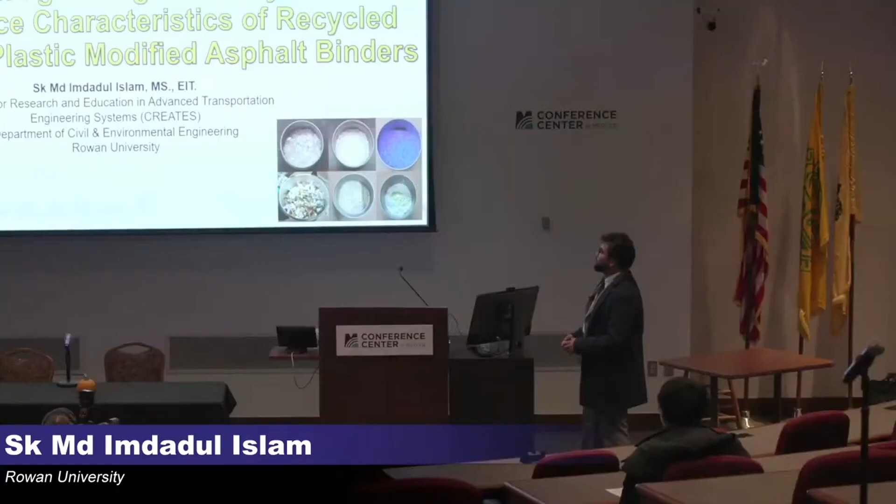Good afternoon, and welcome to my presentation on evaluating the storage stability and performance characteristics of recycled composite plastic modified asphalt binders for the 27th Annual NJDOT Research Showcase. I would like to thank the whole CREATES team from Rowan University under the supervision of Dr. Yusuf Mehta, and also I'd like to thank the US Army Engineers Research and Development Center for funding this project.

Before going deep into the presentation, I'd like to share a quick update on the project I'm working on. Two of my papers, including the one I'm presenting now, have been accepted for presentation at TRB 2026 and also recommended for TRR review.

The whole presentation will be outlined into these categories, starting with a brief discussion on waste plastics, how it has become a global issue nowadays, and how we can incorporate these composite plastics into asphalt binder, the experimental methodology that has been followed, and the results based on phase separation and performance analysis, followed by conclusions and future research scope.

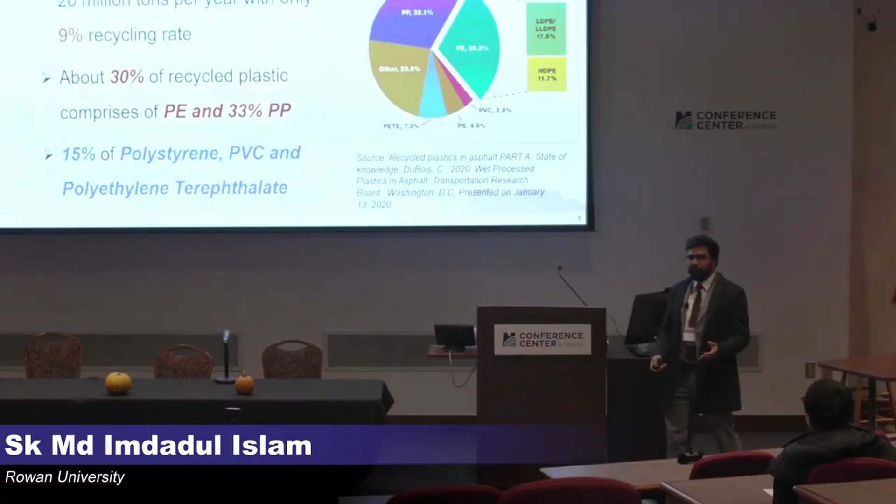If we look into the categories or generation of plastic, the generation of waste plastics has become a major environmental issue, and it's also hazardous for human health. Every year, almost more than 20 million tons of plastics are generated, where the recycling rate is very low, almost 9 or 10%. If we look at the pie chart, we can see there are different types of waste plastics included. Almost 30% is polyethylene, split up into LDPE and HDPE, and another 30% is covered by polypropylene. The others are like polystyrene, PVC, or polyethylene terephthalate.

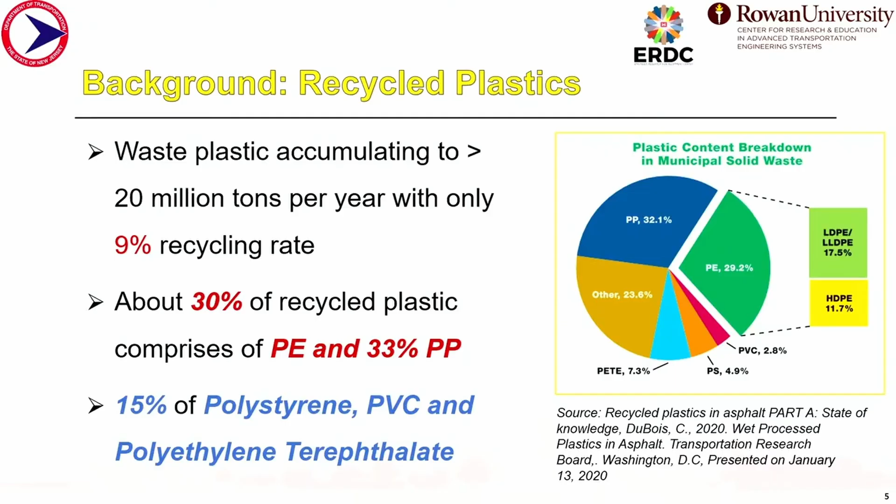Now, as we know there are different types of plastics, how can we identify these plastics? How many of you are holding a plastic glass or anything in your hand right now? If you just look into those plastics, there might be somewhere at the bottom or the corner a code for each type of plastic, whether it is PET, LDPE, or HDPE. So by this code, we can identify these plastics. For HDPE, it means high density polyethylene, LDPE means low density polyethylene, and PP means polypropylene, which actually covers most of the 60% of the overall plastic we saw in our previous picture.

To know better why this plastic is becoming a global issue, we have to know how this plastic recycling chain works. After the end of their use life, the plastic goes into the trash. We just put them in dumpsters, and then they sort it out, move into the recycling industry, shred it into smaller plastics, and then it goes back all the way to the recycling industry for new manufacturing. This percent is the 10% I mentioned earlier, which is very low compared to the overall production each year of waste plastic.

So this 10% is only recycled every year. If we can incorporate these waste plastics into our road infrastructure, there will be a huge scope to fill up this gap with the plastics that go to landfills every year, which is almost 70% of the overall waste plastics.

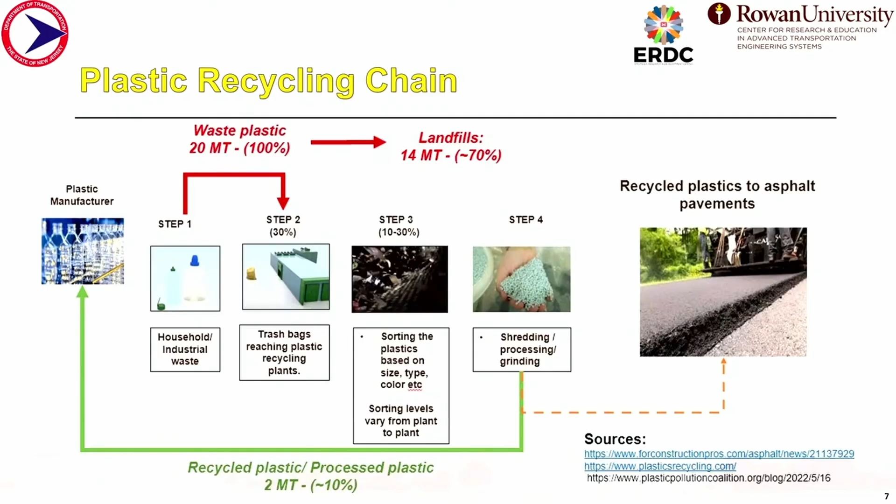As we know, the generation of waste plastics has become a major issue. We also know that pavements in regions with extreme weather or temperature fluctuation experience frost heaving in the winter, and softening effect or rutting in the summer. So how can we merge these two problems and find a solution? We can come up with something to solve these two problems together. The overall objective of the project is to formulate a sustainable pavement or HMA mixture design, including recycled plastics, that can enhance performance to withstand distresses due to weather while mitigating environmental pollution as well.

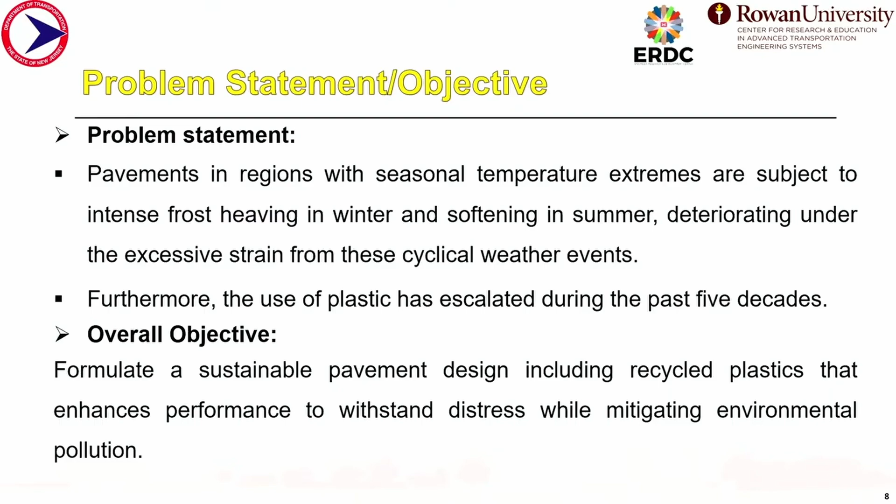Moving forward, this whole presentation will be divided into three main parts, where the first part is how we can incorporate these waste plastics into asphalt binder.

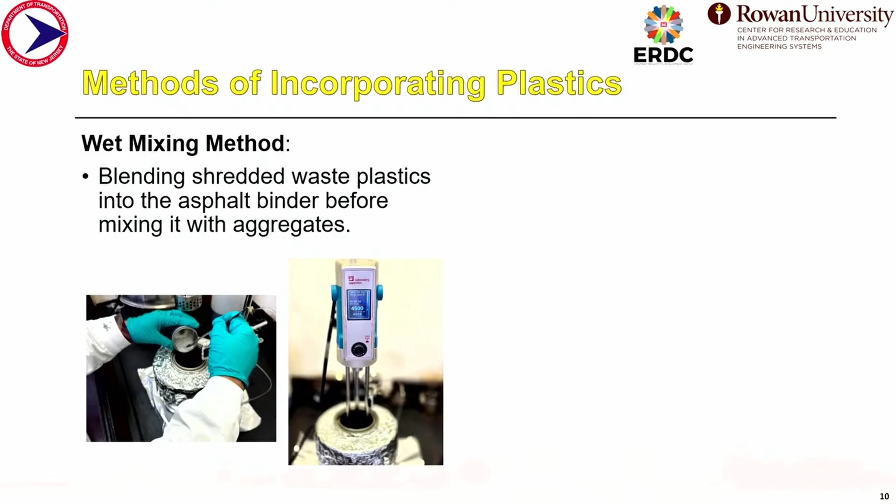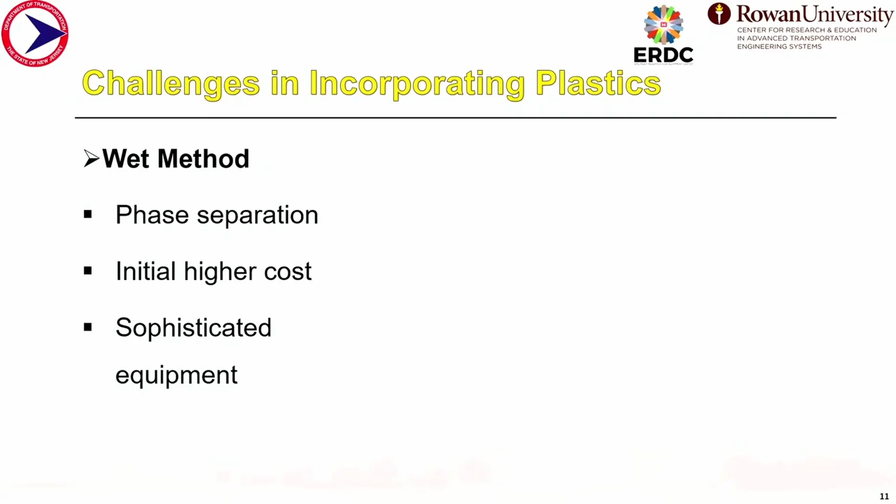As I mentioned, there are two methods, and we have some challenges in both. In the wet mixing method, we have a problem called phase separation, which I will discuss later in the presentation. It also has a slightly higher initial cost compared to the dry mixing method, due to needing sophisticated equipment like the high shear or low shear mixer.

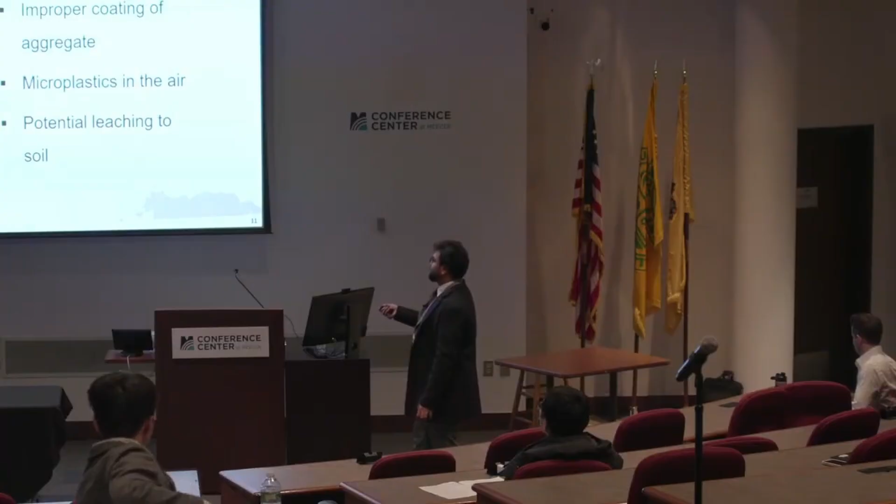On the other hand, in the dry mixing method, we have some serious environmental issues, like microplastics in the air or potential leaching into the soil. Also, we don't know how much or how effectively these plastics are coating the aggregates.

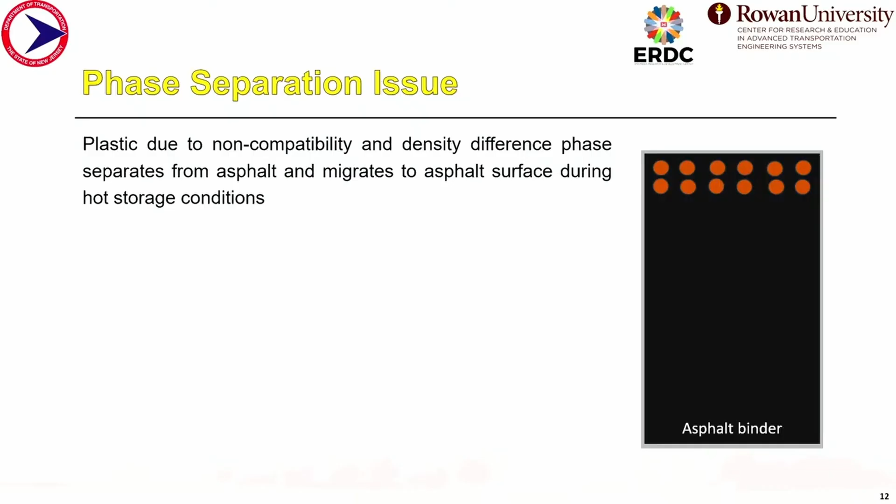So now, why should we care about the phase separation issue, and what is it? Due to the non-compatibility and density difference between the plastic and the asphalt binder, the plastic, after being poured into the asphalt binder, tends to rise to the surface during storage. To better understand this with an animation: imagine this is asphalt binder in a tin. When we pour the shredded waste plastics into the asphalt binder, after the time of storage, they usually tend to go up, as the density of the plastic is much lower than the asphalt binder. This problem is called the phase separation issue in the wet mixing method.

What problems do we face if there is a phase-separated plastic modified asphalt binder? First, there will be variability in field construction. It will not be a homogeneous modified binder, which will eventually reduce the performance of the plastic modified binders, leading to inconsistent pavement quality, premature failure, and higher maintenance cost.

So the solution, since we have to address this phase separation issue if we want to proceed with the wet mixing method, is to enhance the compatibility between the plastics and the asphalt binder using a cross-linking agent to create a homogeneous asphalt binder matrix.

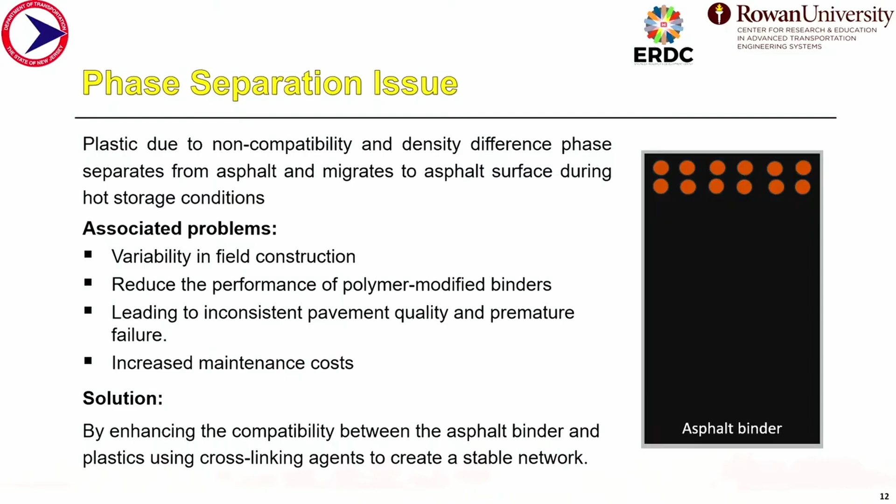With that objective, in our project we selected two types of plastic. In most previous research, researchers used a single source of plastic, like only LDPE, HDPE, or polypropylene. However, in the real field, plastics are not like that - they come mixed; most of them are mixed-use plastic. If we look at a plastic bottle, the top cover is HDPE, and the lower part is LDPE.

So in real life, most of the time we have composite plastic, and according to plastic recyclers, it's sometimes very hard to separate these mixed plastics, which is why they lose demand for recycling purposes. So we chose two types of mixed plastic: one is a mix of HDPE (high density polyethylene), LDPE (low density polyethylene), and PP (polypropylene); the other is a mix of HDPE plus PP.

After grinding and sieving, we get material passing 0.6 mm for blending, because the size, blending time, and everything else were chosen based on an optimization process. After the whole process, we came up with this size for the blending.

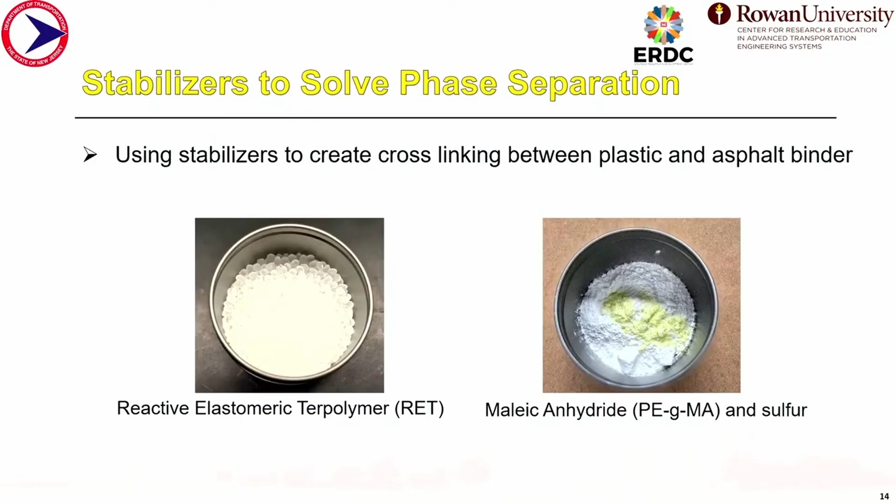The stabilizers selected are reactive elastomeric terpolymer, known as RET, and polyethylene grafted maleic anhydride, known as PE-g-MA, along with sulfur as a cross-linking agent.

This is the experimental methodology followed for the experiments, starting with the virgin binder, PG 58-28, considering extreme cold weather. The idea was that if it can be implemented in extreme weather, it will definitely be applicable to standard weather like New Jersey or others that aren't as extreme, but it will still be implemented. So both mixed plastics were added at a rate of 1, 2, and 3% by binder weight.

We added the stabilizers, including Elvaloy RET 4170 at a 1:1 ratio with the plastic, and also maleic anhydride at 1% by binder weight. Before this mixing or blending procedure, we performed DSC analysis, differential scanning calorimetry, to identify the melting point of these plastics to make sure they don't remain unmelted when added to the asphalt binder, since all these plastics have to be melted. We made sure their melting point is under the usual mixing temperature of 180 degrees Celsius for the asphalt binder while mixing with the plastics.

After blending with these plastics and stabilizers, we did the storage stability assessment, which addresses the problem I mentioned in my previous slides. To do this, we performed the separation index test, also known as the cigar tube separation test, and morphology analysis using fluorescent microscopy.

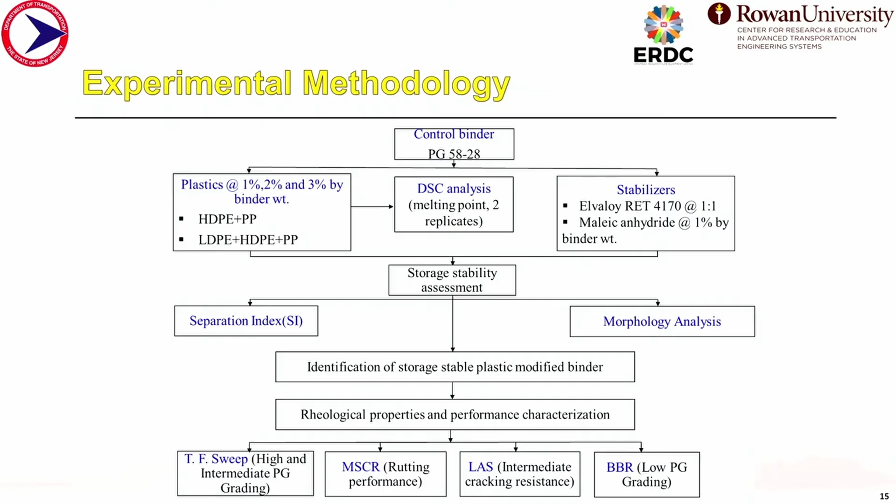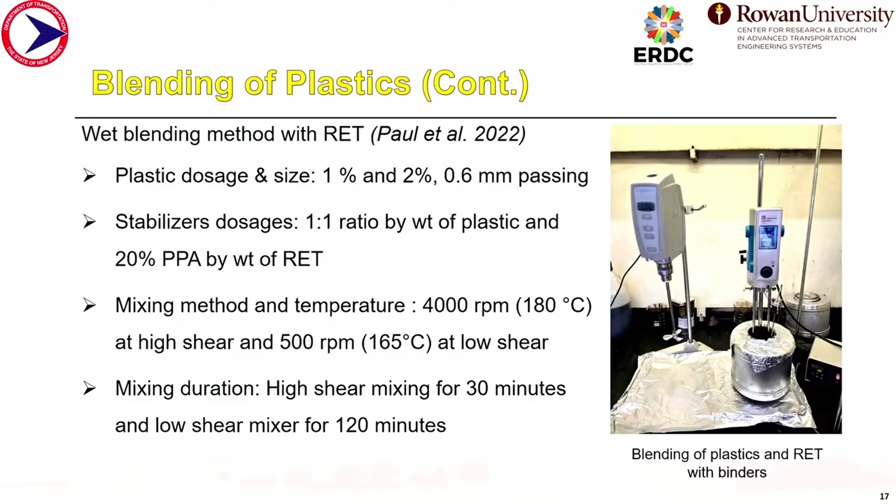With the Elvaloy, there's a bit of difference, as we have to use both high and low shear mixing. Here we see the high shear mixer and the low shear mixer, with different steps in the overall blending procedure starting at 4,000 RPM at 180 degrees Celsius. Then we shift back to low shear mixing at 165 degrees Celsius for another 120 minutes involving the RET.

After doing all these blendings and incorporating the waste plastics, we move to the second part of the presentation, the phase separation assessment. For this, we performed the cigar tube separation test according to ASTM D7173.

After blending all the plastic-modified binder, we poured it into an aluminum tube and kept it vertically for almost 48 hours at 165 degrees Celsius, then shifted it to minus 10 degrees Celsius for another 5 hours. Following that, we discarded the middle portion of the tube and kept the top and bottom portions, running DSR analysis to get G star and sine delta.

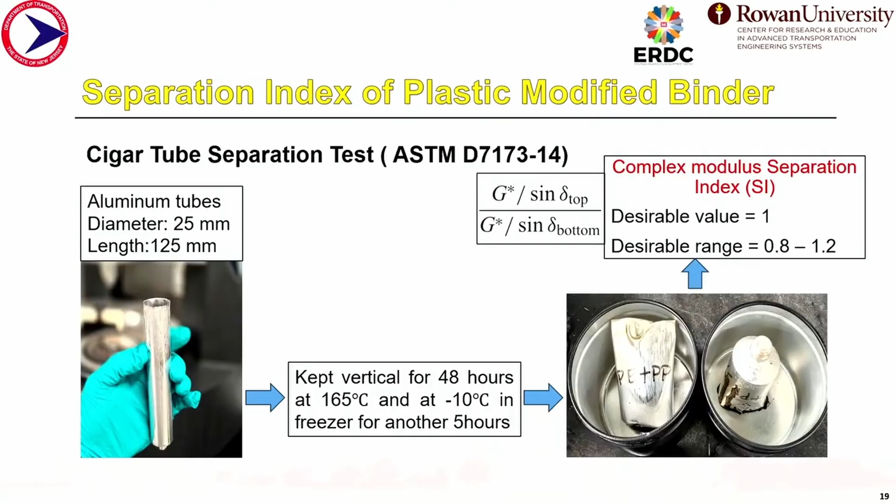The ratio of G star and sine delta is called the complex modulus separation index, which should ideally be 1 if the modified asphalt binder is homogeneous. That means the G star and sine delta ratio from the top and bottom should be equal for a homogeneous mixture, with a desirable variation of 20%, giving a range from 0.8 to 1.2.

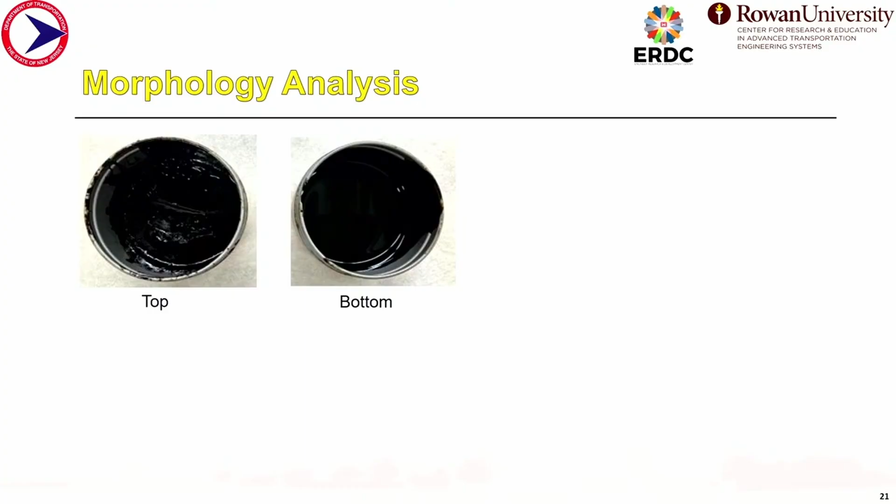To better investigate this separation index, we did fluorescence microscopy on both the top and bottom samples to see the polymer distribution in the blended mixture. We can see the top portion of the binder and the bottom portion from the tube that we get after the polymer modification, using a fluorescent microscope.

We can see the difference clearly at the top. The white globules are the presence of plastic here at the top, and at the bottom we can see there is no plastic. This is called phase separation, and we can clearly see it from here.

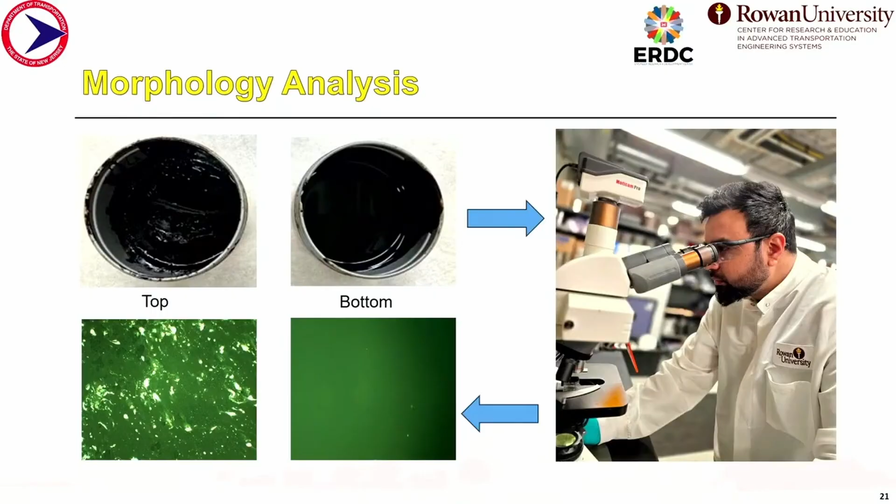Now, moving to the last and third phase of this presentation: the laboratory performance evaluation of these storage stable plastic modified binders.

Starting with the PG grading, we can clearly see that after adding the plastics, for both the LHP and HP plastic, the high PG grading is definitely improving. However, they are compromising the low PG grading.

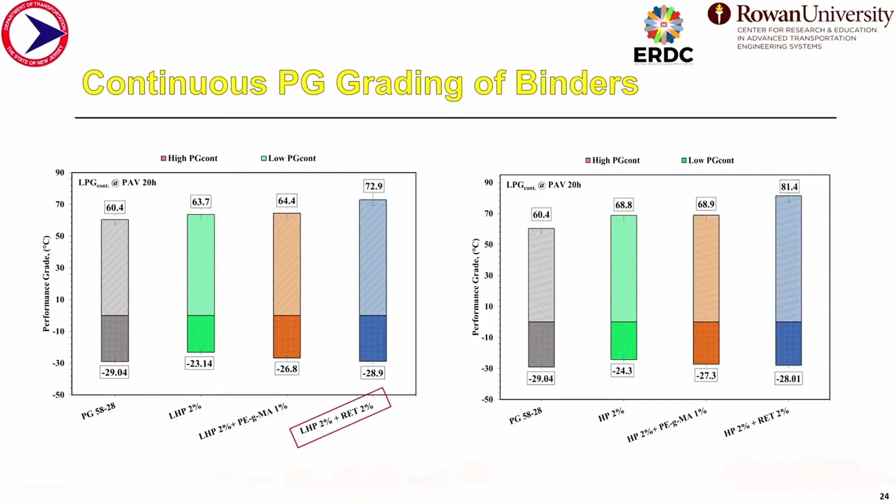But when we add the stabilizers like maleic anhydride and RET, we can clearly see these are improving both the high and low PG grade, where LHP2 with RET is maintaining the low PG grade almost similar to the control binder, which is PG 58-28, and also improving the high PG grade. So from here, we can see RET is performing better than maleic anhydride in terms of both HP and LHP plastic for high and low PG grade.

To further assess the performance at high temperature, we did the rutting characteristics analysis using the multiple stress creep recovery test, where we get the percentage recovery and the JNR value, which is the non-recoverable creep compliance. The higher the percentage recovery for a polymer modified binder, the better the performance of that binder in high temperature or rutting resistance.

From here we can clearly see with the virgin binder and with the plastics, if we go down with the stabilizers, the percentage recovery is increasing with both HP and LHP plastic, where again LHP 2% plastic with RET is showing higher results in percentage recovery.

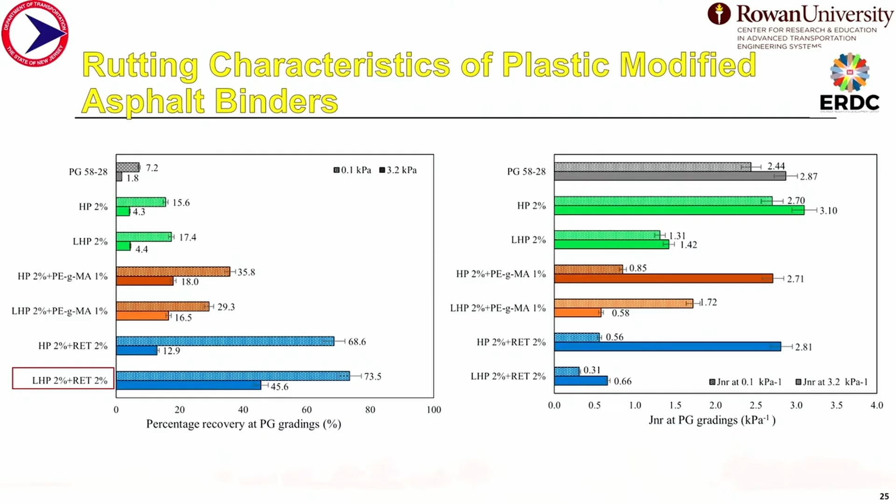On the other hand, the lower the JNR value, the better the performance will be in rutting resistance. Here we can again clearly see the LHP with RET is showing a lower JNR value than the HP with RET combination. From here we can again say that RET exhibits lower JNR and higher percentage recovery, indicating it enhances rutting resistance across various stress levels, as we tested at 0.1 and 3.2 kilopascal.

Now, moving forward, we also did the fatigue life analysis of these plastic modified binders. On the left-hand side, we can see the LAS test at 2.5% strain, and on the right side at 5% strain for the LAS analysis.

Starting with the very left corner, we can see after adding the plastics, there is a reduction in fatigue life for both HP and LHP plastic compared to the virgin binder. However, following the same trend, the maleic anhydride and RET stabilizers increase the fatigue life, where we can clearly see that RET is outperforming the maleic anhydride in terms of fatigue life increment.

At 2.5% strain, the HP plastic with RET performed pretty well. However, at the higher 5% strain, we can see the trend of reducing fatigue life, but the LHP and RET combination shows less reduction in fatigue life. So from here we can conclude that RET is enhancing fatigue resistance, which increases flexibility in the modified binder matrix, thereby promoting better crack resistance.

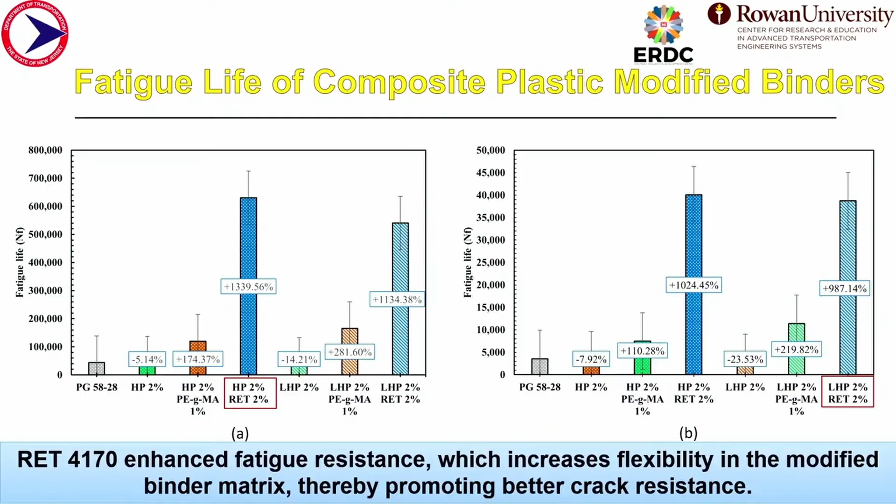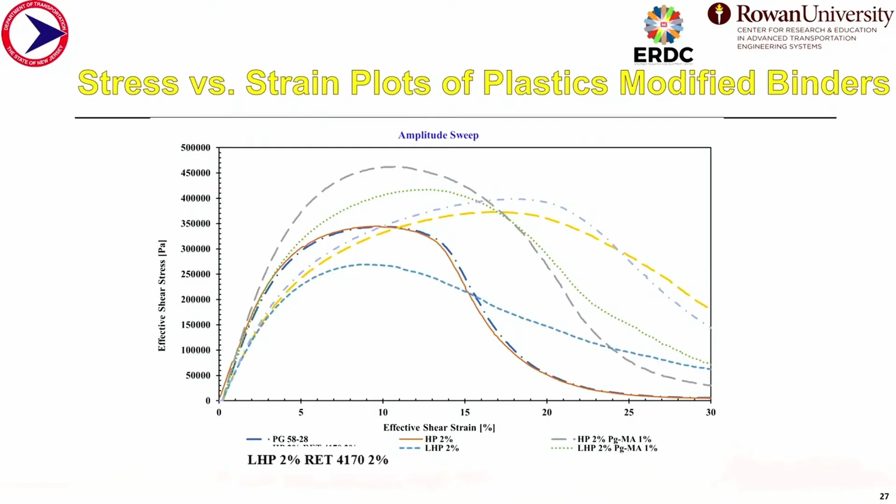For the LAS test, we also did the frequency sweep and amplitude sweep. This is the amplitude sweep results for this modified binder. On the x-axis is effective shear strain, and on the y-axis is effective shear stress. We can see the light blue line, which is LHP2 and RET2, showing the higher failure strength with peak stress, which means it's showing the ductility of this modified binder.

So from here we can again see that the RET modified binders, both for the HP and LHP, especially for the LHP, are performing better, showing ductile behavior, which was helpful in improving the cracking resistance that we have seen already in our previous slide.

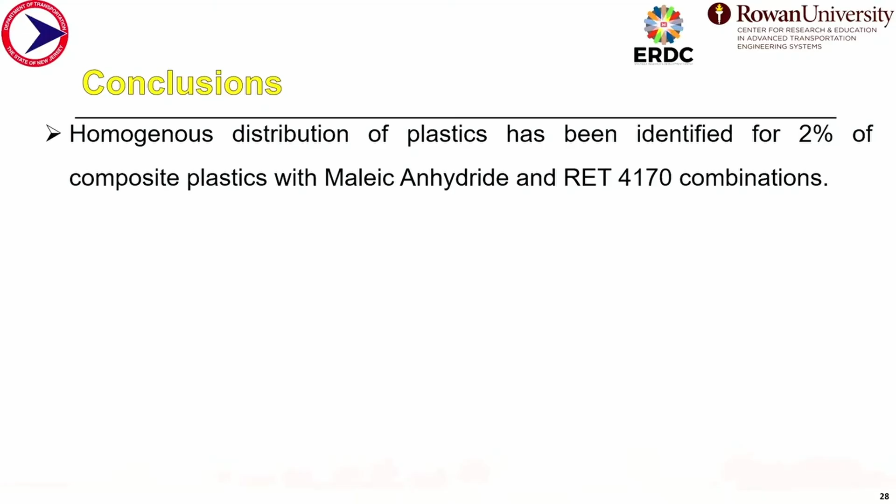So what can we conclude from these results? First of all, we identified a homogeneous mixture, with no phase separation issue, in the wet mixing method with maleic anhydride and RET 4170 stabilizers with 2% plastics. And between maleic anhydride and RET 4170, RET showed noticeable improvement in terms of high and low PG grade, enhanced rutting and fatigue cracking resistance compared to the plastic and maleic anhydride modified binders.

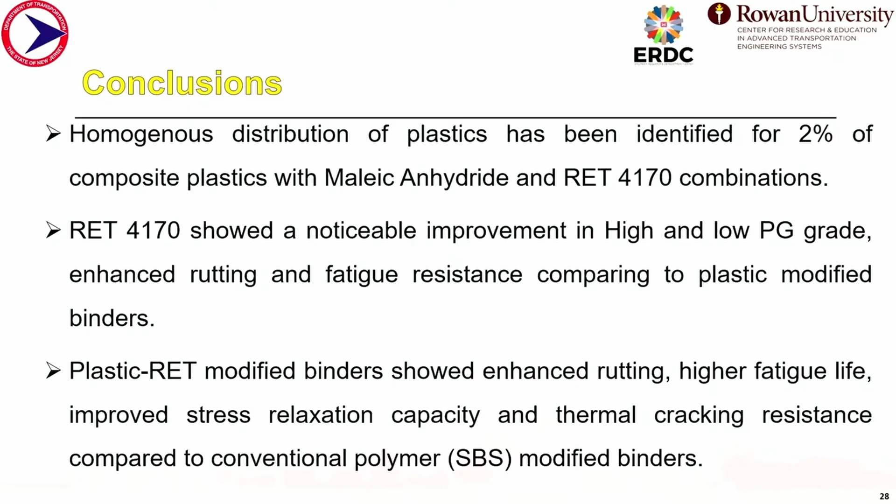It's worth mentioning that we also did a comparative study with the plastic and RET modified binder against the conventional polymer modified binder we have in industry now, which is SBS modified binder. Surprisingly, we found that the plastic RET modified binder showed enhanced rutting, higher fatigue life, improved stress relaxation capacity, and thermal cracking resistance compared to the conventional SBS modified binder.

As a recommendation, improved storage stability and performance of composite plastic modified binders can be achieved using stabilizers such as maleic anhydride and RET, up to 2% of plastic, whether mixed or single-use plastic. Among these, RET performed better compared to the plastic modified binder and the modified binders with plastic and maleic anhydride.

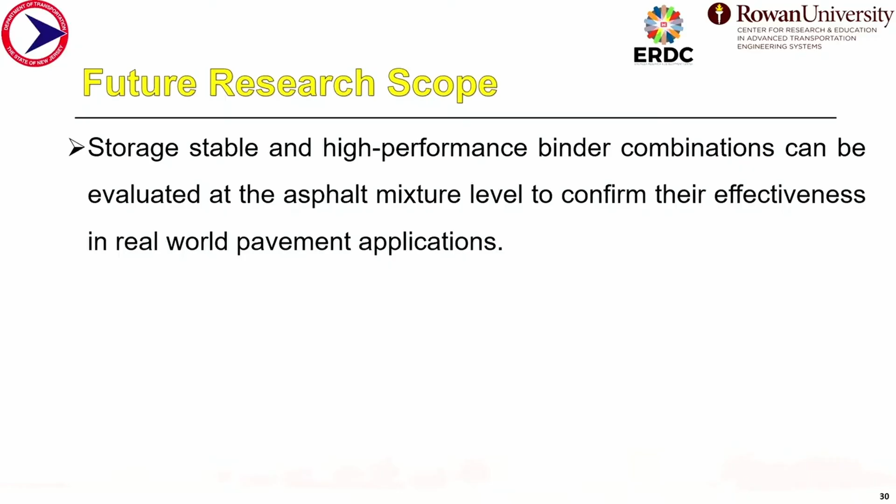So what can be the future research scope? As we did the study at the binder level, to get real-life implementation in HMA pavements, we have to conduct the study at the HMA mixture level to see whether the performance we are getting at the binder level transfers to the mixture level as well.

Last, but most importantly, we have to look for long-term performance data and conduct a life cycle cost analysis for this storage stable modified binder to see its cost efficiency.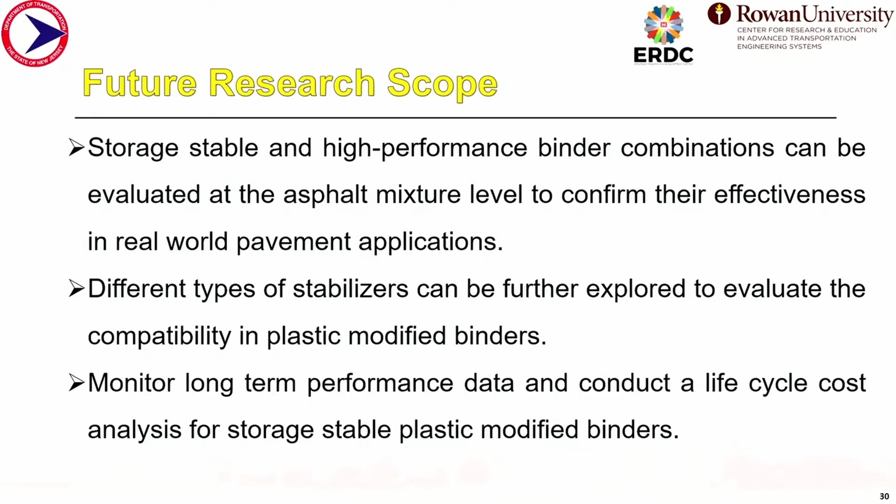So how can this study benefit government agencies like NJDOT? First of all, it's going to give enhanced performance with improved rutting and cracking resistance of the asphalt pavement, and eventually a longer lifespan of the road, which will reduce maintenance cost.

And most importantly, it will help fulfill the sustainability goal of SDG 11, sustainable cities and communities, by incorporating these waste plastics, preventing environmental pollution, and supporting the circular economy, involving plastic recyclers, contractors, and government agencies like NJDOT.

I know it's been a little bit boring after lunch, but thank you all for hanging on there.

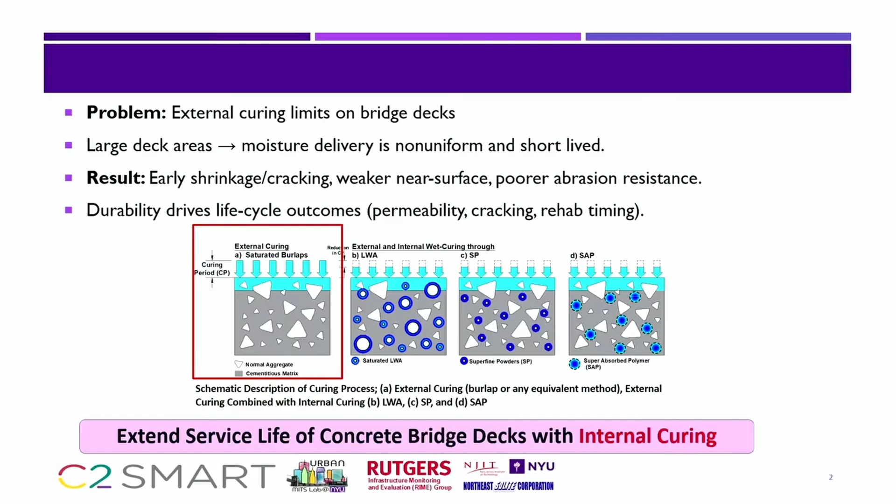So there's a problem of curing when you pour concrete, and there are ways to deal with that. If you don't do the curing well, there'll be cracking. If there's cracking, there'll be problems later on. So there's a drive to fix this problem. And the important part of this, as far as this presentation is concerned, is if there's cracking due to how you treat the concrete in the beginning of its life, there'll be a problem during its life cycle. That will create problems about maintenance, more maintenance, more rehabilitation, and so on, and it will eventually increase the life cycle cost of that bridge deck.

So it looks like there's a lot of new research that Hani's group is doing at Rutgers dealing with internal curing. Basically, it's a better way of curing, and this is an explanation of how this is done. Instead of doing some traditional way of curing, you want to use advanced methods like pre-wetted lightweight fines, superabsorbent polymer, and so on, that will release water inside the concrete. You sustain the internal humidity doing that, and all of that is just to avoid cracking during the curing process.

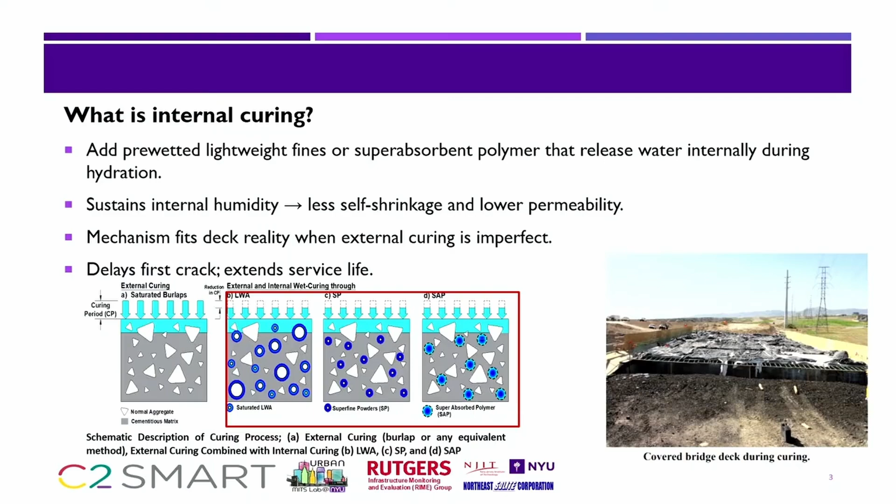So that's kind of the explanation of why we are doing this method overall. This is the importance of internal curing. As I said, it allows reduced cracking, and it avoids later on problems with the bridge deck, deterioration, and so on. So that's the whole thing.

Let me just go back to Nick Vitillo days. This is actually one of the first projects I did almost 25 years ago, when I started as an assistant professor at Rutgers before I moved to NYU. There was a gentleman called Dick Weed, none of you would know. Dick had been with DOT for a long time, and he was interested in life cycle cost analysis. He created a project, and this was my introduction to life cycle cost analysis, because I was doing more technology, intelligent transportation systems. Dick created a problem statement, like you guys do today, and we were able to get that project awarded to Rutgers at that point, I think 1998. So some of you weren't even born then.

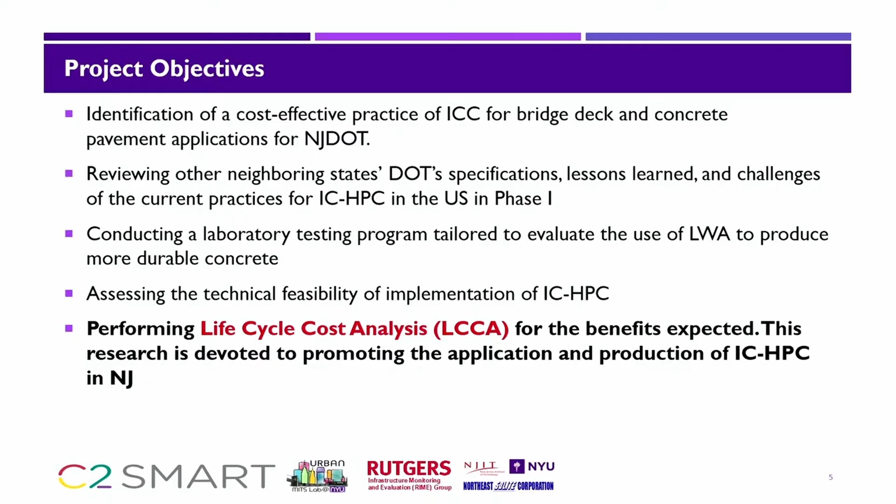What happened is Dick was obsessed with one thing about life cycle cost analysis: discount rate and inflation. At that time, this was not a big problem, and actually there were a lot of discussions with another university, another professor from City University of New York, about whether that's important, whether we really need to care about discount rate and inflation, since we really didn't have great problems with that. But it was our introduction to life cycle cost analysis, and then me and my PhD student wrote the first kind of guidelines for life cycle cost analysis for NJDOT. It's still available online, you can find it. It's one of our papers that we wrote together that was highly cited.

I think some of the ideas we developed at that time, we're still using them here. Actually, people are still referring to our paper, which means they're learning from our paper.

One side note: life cycle cost analysis is generally used for structures and material projects, but we also apply them to intelligent transportation systems. There's a difference because these projects are very long-term, talking about 50 to 75 years, while ITS projects have a life cycle of 5 to 10 years maximum. So you need different ideas for how to use life cycle analysis for that.

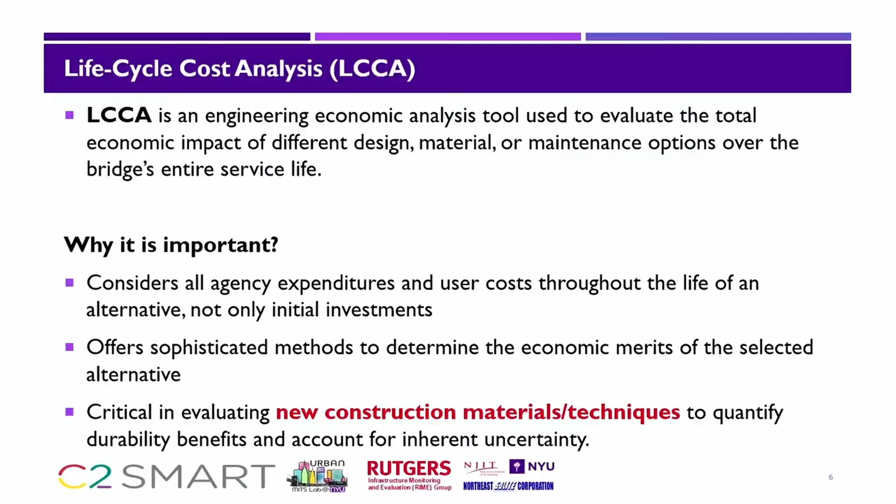So, life cycle cost analysis is an engineering economic tool. It's important because it not only considers agency expenditures, but also user cost—drivers, commuters, and so on—and what we call external costs, social costs. This was important, and was actually one of the key points we discussed even at that time, because how you incorporate these different cost categories into your life cycle cost analysis matters.

Here, since it's a very small task, we don't go into details of how to incorporate each cost category individually. But I'll give you an idea, which you can also think about for other projects, of what it means to have different cost categories.

In our work, and in general, people just use deterministic life cycle cost analysis. That means they fix the input, and then calculate the life cycle cost for a period of time, whatever that period of time is.

But what we advocated is, because you're dealing with such a long period of time, it's more appropriate to do a probabilistic life cycle cost analysis—meaning you assume variables might change probabilistically within certain limits over that lifetime. Then you calculate those probabilistic values using something like Monte Carlo analysis, and your life cycle becomes a distribution of possible life cycle costs that you compare.

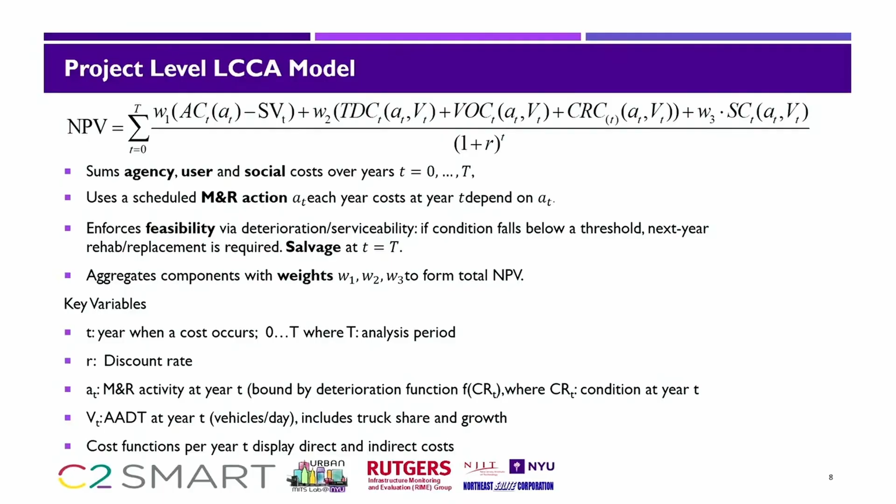For each of these, you have to assume some values for the parameters so you can calculate this function over, let's say, 50 or 75 years. You don't want to do that manually, especially if you assume you have thousands of bridges.

So as part of a different project, we worked with Missouri DOT and US DOT. We developed a spreadsheet you could use to calculate these costs for different types of bridges automatically, using whatever input values you want. You can actually enter the cost variables.

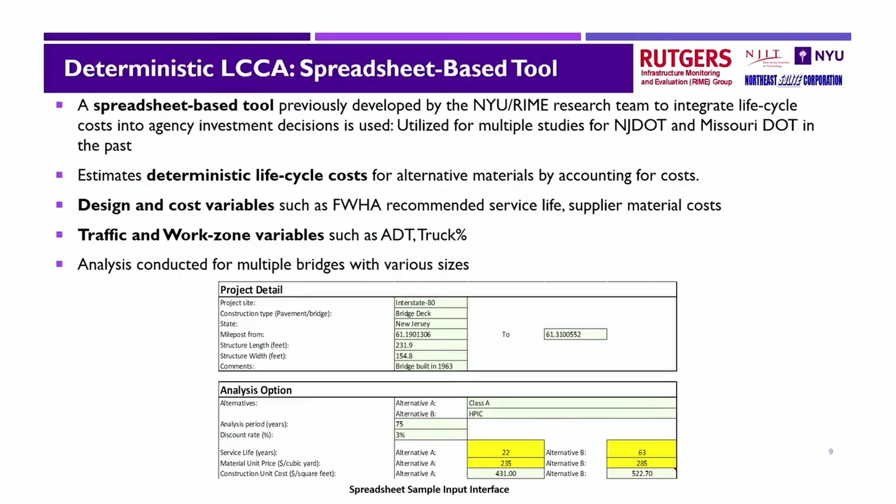But the spreadsheet is very easy. In fact, when I did this project a couple of times for different occasions, we tried to do a web-based version, and it had its own complications. So the best way was to have a regular Excel spreadsheet that anybody can use. So these are the numbers.

So I put the caveat that these numbers are not necessarily NJDOT numbers. These are the numbers we assumed based on federal highway assumptions. Obviously every state is different, and the practices are different, but this gives you an idea.

For regular concrete, it's like 22 years of service life, HPC 40 years, HPIC 63 years. Again, for NJDOT these numbers might change.

Material costs are the most tricky ones, and they're changing every day. There's a new tariff, it's 100 times more, there's more inflation, it's 50 times more. So these are the material numbers that Professor Nassif's student got from manufacturers, we got from the literature. But we also have numbers from NJDOT that we will add here, and they're not the same. They're different, actually.

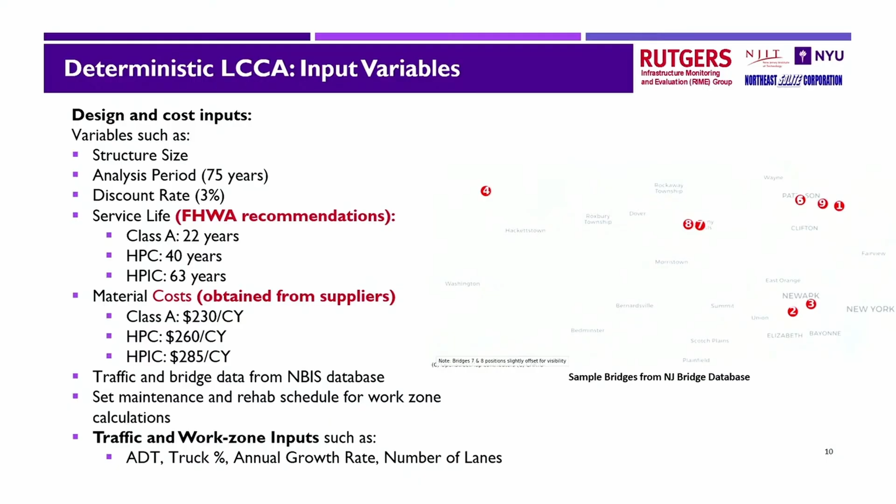But the good thing about the spreadsheet is, if you have the numbers, you put them in and you get the overall life cycle. Of course you also need to make some other input assumptions, like average daily traffic, truck percentage, annual growth rate, number of lanes, and so on.

There are a couple of things you have to be careful about when doing this kind of long-term analysis. You cannot grow, for example, the AADT indefinitely. So you need to have some constraints on certain variables that should physically make sense, especially if you're looking at one segment, one bridge. So that's also in the spreadsheet.

So what we want to see is if HPIC versus HPC is more beneficial in terms of service life, agency cost, and overall social cost. To do that, we took one bridge from I-80, and put the variables related to that bridge into the spreadsheet. We found that HPIC is much more advantageous with respect to regular Class A concrete, and there's also a lot of savings versus HPC.

But as you see, these are some point estimates that we're using. Still, it gives us an idea that this new method, due to less cracking and less long-term rehabilitation and maintenance needs, is going to be much more advantageous than the other two methods.

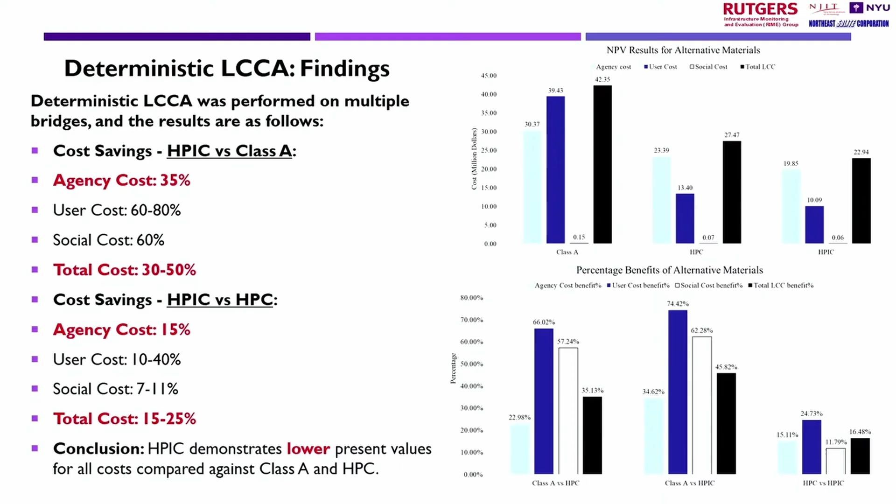Compared to HPC, there's 15% less agency cost, user cost can be between 10 to 40%, social cost is around 10%, and total cost savings between 15 to 25%. So if you multiply that with all the bridges you will build or rehabilitate in the near future, that might translate into some meaningful numbers.

But we want to do a little bit more than that. Because it's a long time period, we want to take the uncertainty into account and do a probabilistic analysis.

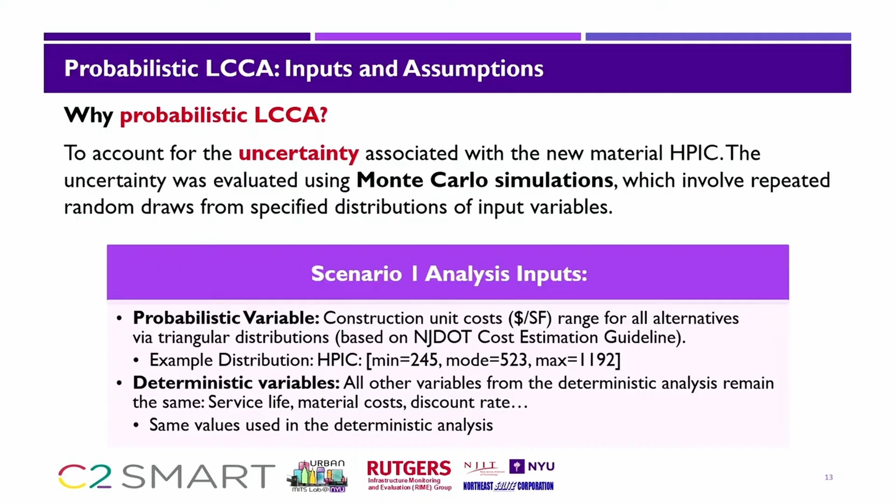This means we're going to draw these variable values from a predetermined distribution, and we will use Monte Carlo simulation to calculate the life cycle cost analysis for HPC and HPIC many times to see how they change based on these probabilistic numbers from predetermined distributions.

When we do that, 5,000 runs—you can do 10,000, however many runs—this doesn't take too long for a single bridge or multiple bridges. But if you have to do that for 5,000 bridges, obviously it will take much longer. You can build these distributions for HPC and HPIC costs for different runs.

And you see this, they look like a Gaussian distribution. And if I draw the CDFs, then you see that for most of the probabilities, HPIC remains a better option if I look at the CDFs.

This was only for one variable, changing the construction cost. But if you change multiple variables, the simulations become more difficult.

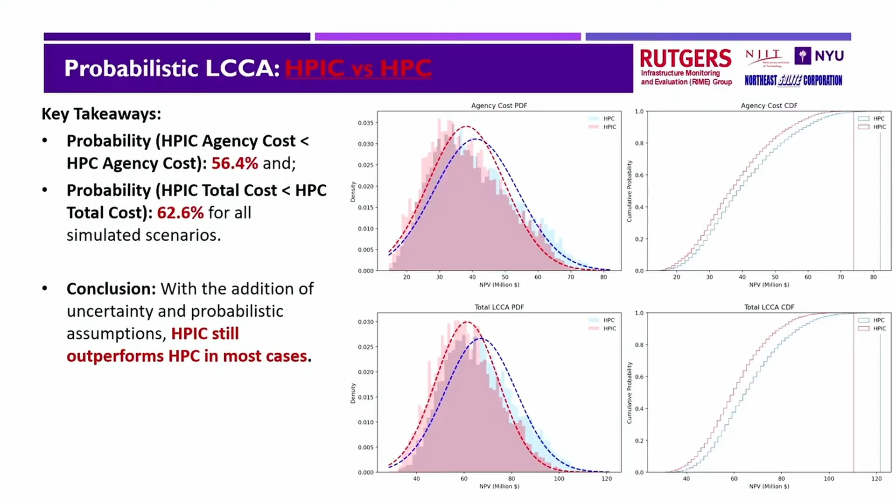So HPIC still outperforms HPC. One thing to note, we did this for 9 bridges. If you want to do this for thousands of bridges, you need a different approach. And if you have to optimize this, for example for a budget constraint, you need some kind of optimization algorithm, like genetic algorithms, which would be even more computationally demanding, but we're not going to do that. We're just running this for multiple bridges and seeing how it works for different ranges of probabilistic values.

So the last topic was a discussion from our projects, basically looking at the social cost of carbon, which comes from a paper published in Nature. It's a long topic, and there's no time to go into detail—this isn't our invention, but some people looked at the social cost of carbon. That means if some approach releases carbon, it might, in the long run, have effects on the environment, and they quantified this effect. We then tried to do some very simple analysis based on the values in that paper.

What we found is that HPIC has higher benefits, even though it has some higher carbon release in the beginning, over a long time at different discount rates. I don't know if this will stay in the final report, but this was a discussion, and these results show that even though the initial carbon footprint of this method is a little higher than regular HPC, in the long run, due to its advantages, it still becomes superior to HPC.

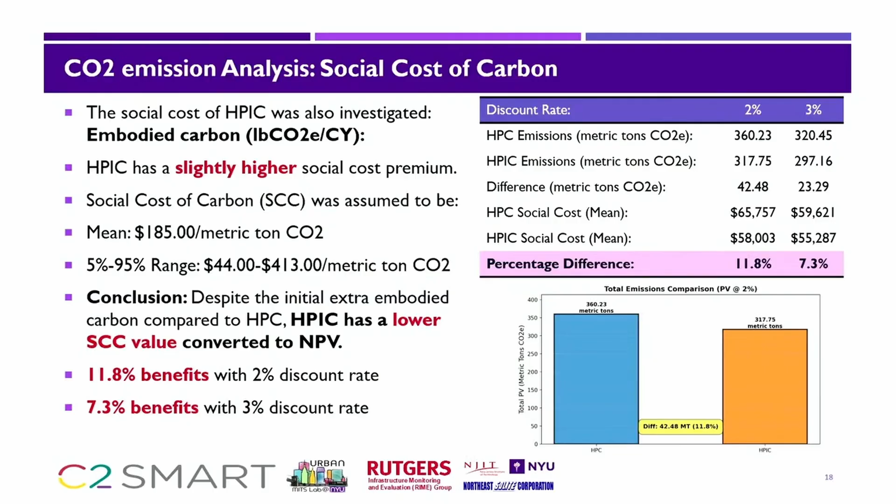So the conclusion is that for most of the bridges we tested, HPIC costs are lower than HPC costs. The total savings are around 30 to 50 percent for using HPIC versus regular concrete, and HPIC versus HPC, that's between 15 to 25%. If you think about the number of bridges and projects, that might translate into some meaningful savings. We also did a probabilistic analysis that showed similar results, maybe with lower gains due to the possibilities and combinations of different probabilistic values. In the social cost analysis, HPIC also turned out to be more beneficial, although its initial carbon footprint is a little higher.

So that's pretty much where we are. The report and results are still being reviewed. We're adding New Jersey numbers—I don't know exactly, Hani knows it better than I do. There'll be a final report that'll be available to NJDOT. So with that, I'm going to stop and see if there are any questions.

All right, thank you, Professor. That sounds like my class.

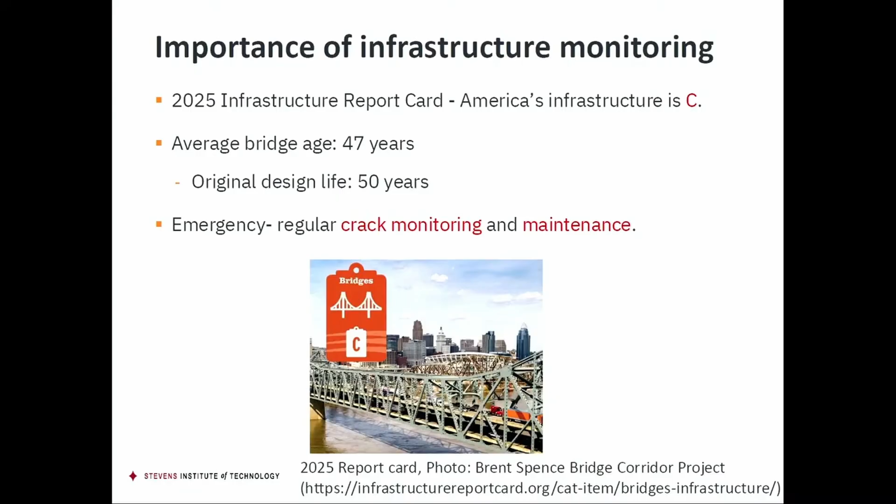That means we should do regular crack monitoring and maintenance. Although there are already existing crack monitoring techniques, such as acoustic emission, static distributed fiber optic sensing, and robot-assisted inspection, they all have different advantages, such as far-field crack monitoring, finer spatial resolution, and reduced human intervention.

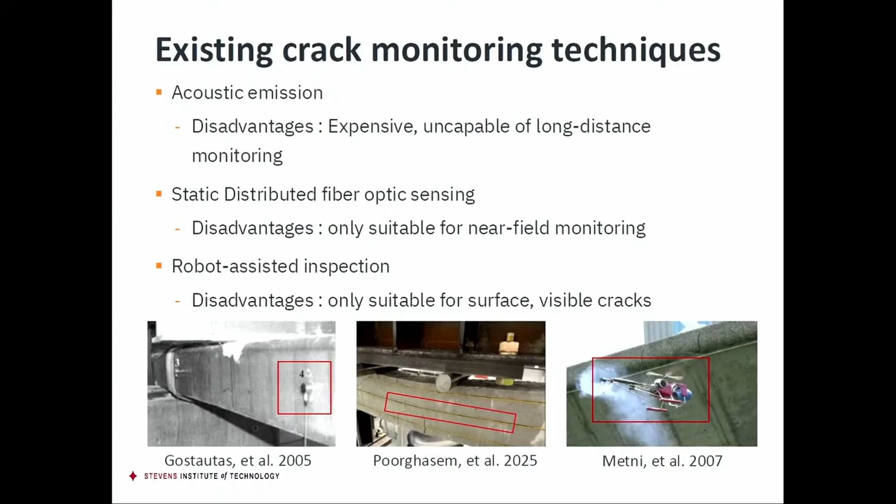However, if we use them for far-field and long-distance infrastructure crack monitoring, especially for bridges, they have disadvantages, such as being expensive. Acoustic emission is a point-based sensor, so it's expensive if you lay out a lot of sensors. Second, static DFOS is only suitable for near-field monitoring. As for robot-assisted inspection, it's only suitable for surface and visible cracks.

This led us to focus on an emerging technique called distributed acoustic sensing, or DAS. It's based on Rayleigh backscattering, and is already widely used in traffic monitoring, seismic monitoring, and marine life monitoring. It has shown far-field monitoring, real-time monitoring, and long-distance monitoring capabilities with cost-effectiveness.

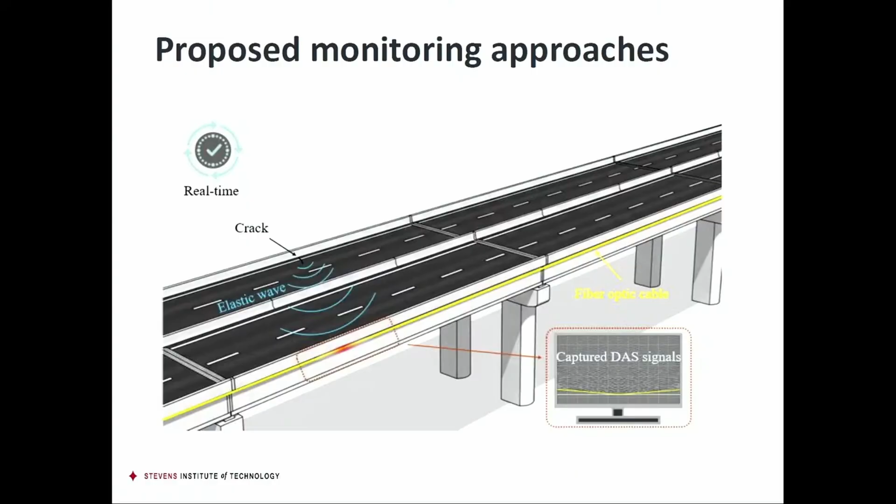Then we proposed this method. First, we installed the fiber optic cable at the bottom of the bridge deck. When the crack initiates or propagates, it generates elastic waves which can be captured by our fiber optic cable. In real time, you will see the stream at the data acquisition system, and by analyzing the DAS signals, you will find where the crack is.

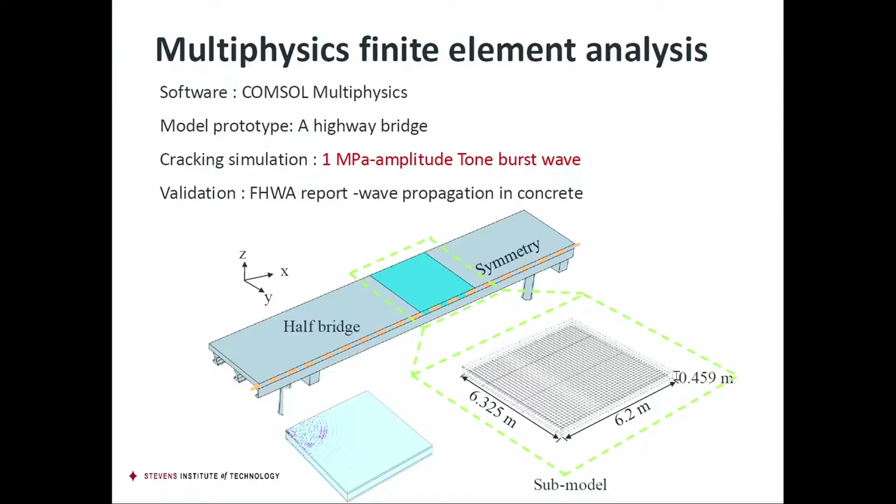After proposing this method, we wanted to validate it, so we tried multi-physics finite element analysis. Our model is based on a typical highway bridge in the US. To be conservative, we used a very extreme small amplitude, a 1 megapascal amplitude tone burst wave, to simulate the cracking signals. To validate it, we used the FHWA report on wave propagation in concrete.

After proposing the method and completing the numerical simulation, we considered whether we could transfer the simulation results to real DAS signals, because most researchers have overlooked that—they think the simulation results are the same as the real results, but actually they're not, because the simulation is influenced by the mesh and other dimensions.

Also, the DAS system has different configurations, like gauge length, channel spacing, and sampling rate. So we did data processing, proposing to use cleaning, moving average, spatial downsampling, and temporal downsampling to achieve the conversion from simulation results to DAS signals. Then I'll show you our preliminary results.

The first important question is whether a crack can be monitored. We set a clear criterion: if the DAS signals we captured exceed the DAS sensitivity, measured in nanostrain, then we assume the crack can be monitored by the DAS. As shown here, our analysis found cracks larger than 20 millimeters in length and 20 millimeters in depth can be monitored at 6 meters away.

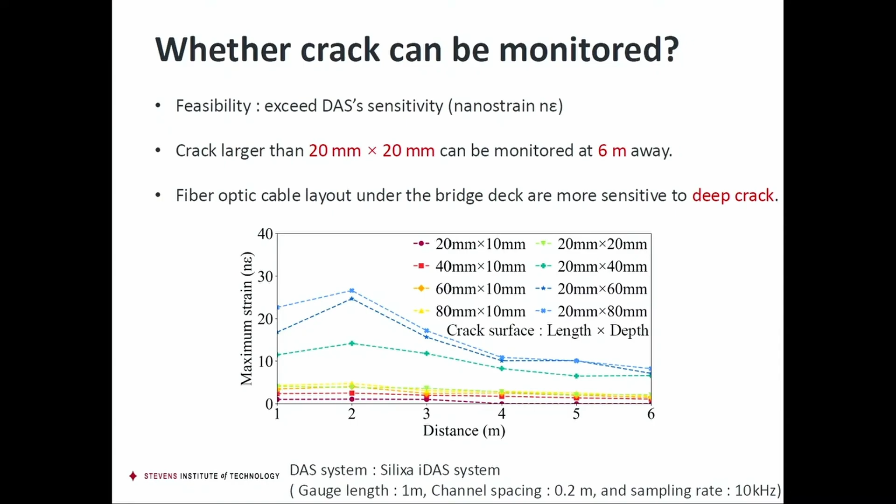If we get DAS signals and don't know whether they belong to a crack, traffic, or pedestrians, we use a method that analyzes frequency. To be conservative, we used an extreme small frequency for the cracking signals, 15.4 kilohertz. We set a monitoring point at far field, 6 meters away, at the bottom of the bridge deck. We captured and analyzed the wave, and found the frequency spectrum always exceeded 10 kilohertz, even at 6 meters away.

This is significantly higher than vehicular traffic and pedestrian activities.

At last, we are thinking about whether a crack can be located using the DAS signals. So we have done a lot of tests, 60 sets of data with different crack sizes and different distances between the crack and the fiber optic cable.

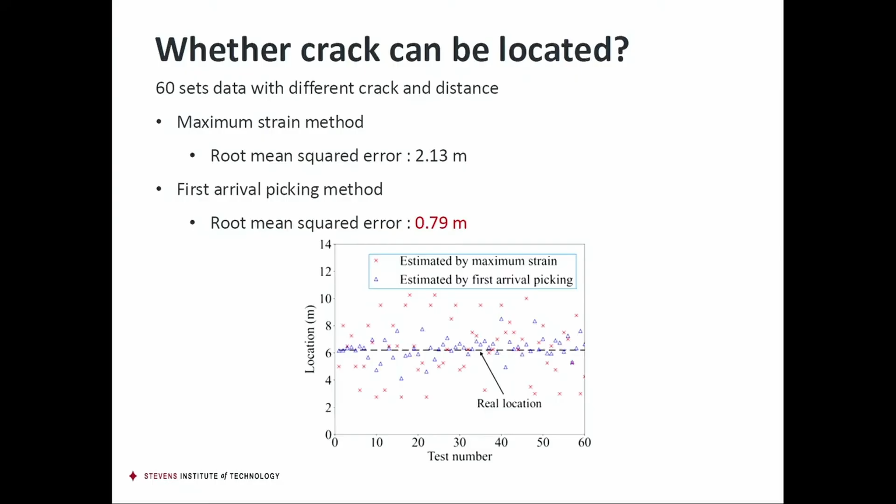And we use two methods. The first one is the maximum strain method, and we found the results are not promising. So we proposed another method, which is the first arrival picking method. This method has already been widely used in acoustic emission and also ultrasonic testing, and we got promising results.

So after the initial validation of our proposed method, we wanted to know what influencing factors will influence the potential performance. The first and most important is the system configurations. We have done a parametric analysis with different configurations of the system, and we found that especially three parameters—gauge length, channel spacing, and sampling rate—will significantly change the signals you captured and extremely change the signal features, such as amplitude and also the waveform.

So we quantified it as the absolute maximum strain and estimated crack location. And finally, we found that coarser gauge length, lower sampling rates, and also coarser channel spacing will lead to underestimation of crack severity. Among the configuration parameters of the DAS system, channel spacing exhibits the most significant impact on localization performance. So if you use the DAS system to monitor a far-field crack, it's better to use a finer channel spacing.

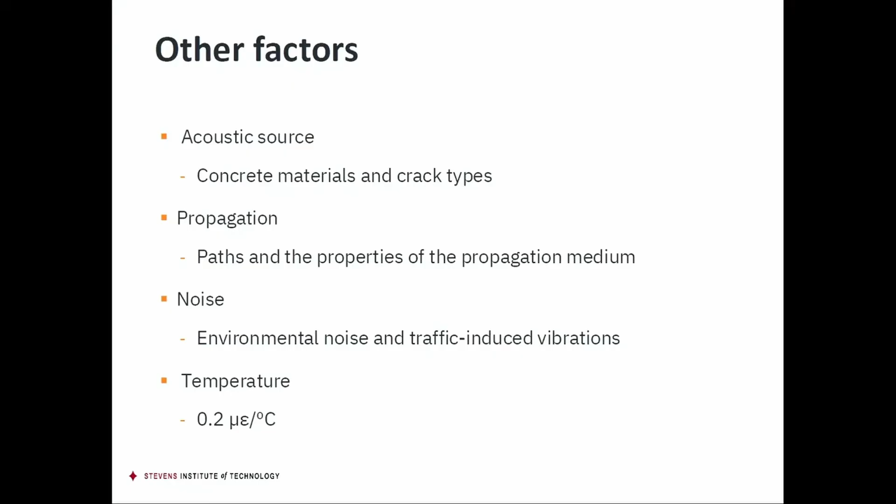However, it's also easy to deal with it. We can use temperature compensation, such as installing another distributed temperature sensor. And due to the temperature change always being a long-term change, at least minutes or hours, but the cracking signal is at the millisecond level, it's easy to do the compensation.

And finally, we have done a comparative evaluation. First is the performance. Although there are already some other existing monitoring techniques, such as acoustic emission and static DFOS—although acoustic emission has higher sensitivity, it's just a point sensor, and we cannot use it for long-term or long-distance far-field crack monitoring. Static DFOS has a sensitivity of microstrain, which cannot achieve far-field crack monitoring. However, DAS can do it.

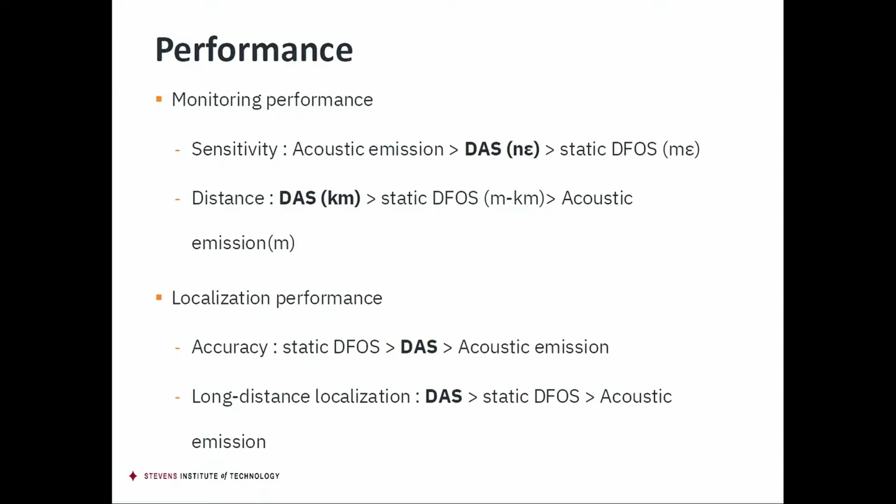Then we have done an economic analysis to show you what we can do and how cost effective it is. We assume that we want to do crack monitoring on a 20 kilometer long and 12 meter wide reinforced concrete sea crossing bridge. And we have used 3 different methods: static DFOS, DAS, and AE.

However, if we use acoustic emission, we should lay out a lot of sensors to build a sensing array, and we also need a lot of cables, a data acquisition system, and a preamplifier, but the cost will be much higher. And if we use static DFOS, as I said before, it just has a sensitivity of microstrain and cannot achieve far-field monitoring, so you should install at least 11 fiber optic cables. However, if we use DAS, we can just use a single fiber optic cable and a data acquisition system.

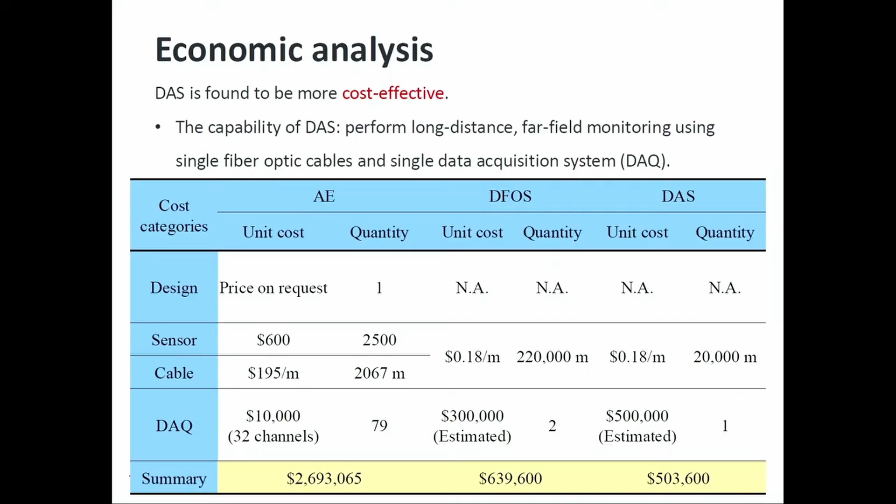It's evident that DAS is found to be more cost-effective compared with other techniques. This is due to the capability of DAS to perform long-distance far-field monitoring using a single fiber optic cable and a single data acquisition system. Then we jump into the final part, the conclusion.

Our research has confirmed that the DAS-based approach was effective in monitoring far-field cracks in the preliminary test. Second, we have proposed a first arrival picking method to achieve high accuracy crack localization.

Third, by doing the parametric analysis, we have found coarse gauge length, lower sampling rate, and coarser channel spacing will influence the underestimation of the maximum strain values and crack severity. Among them, channel spacing exhibits significant impact on the localization performance.

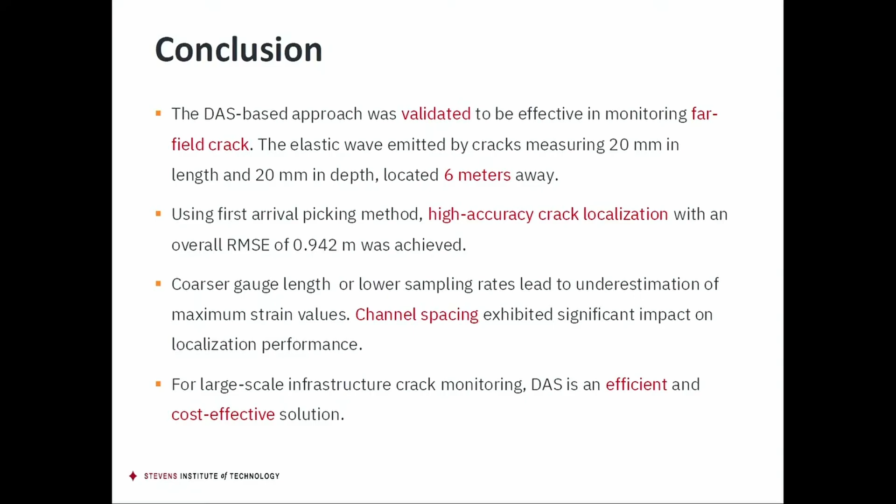And at the end, we have done a case study, and we found for large-scale infrastructure crack monitoring, DAS is an efficient and cost-effective solution. And here are the references supporting our research. Thank you for your attention.

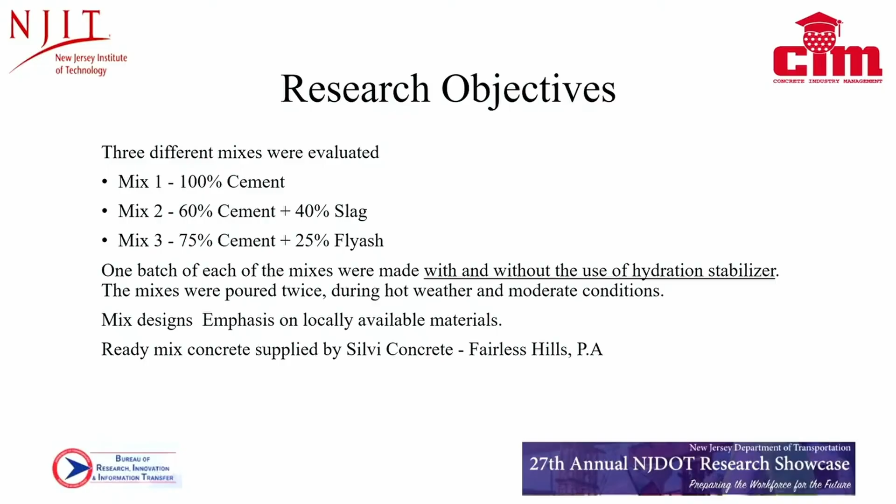Part of the research is we did 3 mixes. Mix 1, control, 100% Portland cement. Mix 2 and mix 3, utilizing cementitious materials, in this case 40% slag and 25% fly ash. We actually did the research at an actual ready-mix facility so we could emulate realistic results, as opposed to doing it in a small mixer in a lab. So we chose that option, and we had those sponsors and so on.

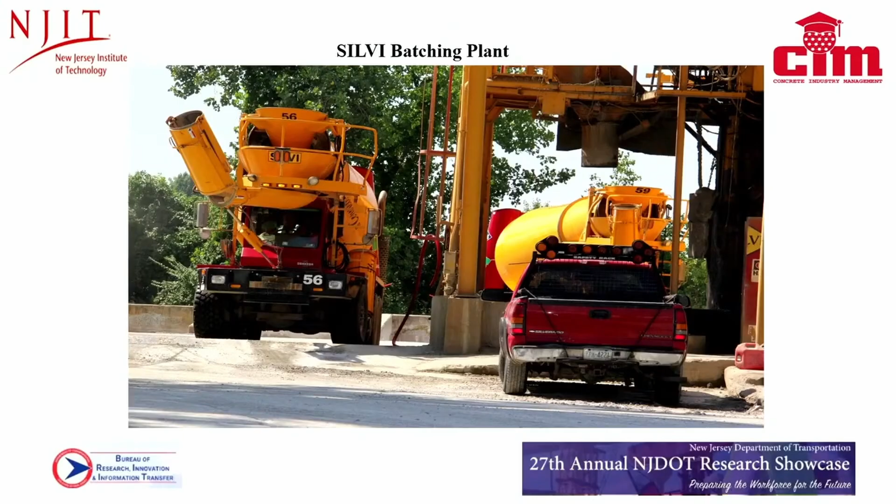This was in Pennsylvania at Silvi Concrete. We conducted pretty much all the basic tests, from compression tests, initial fresh concrete tests, slump tests, entrainment, temperature, water content, etc. And of course, we made samples to do compression and flexural tests as well as permeability tests, because a subsequent set of research we ended up doing off of this is the long-term effect on freeze-thaw.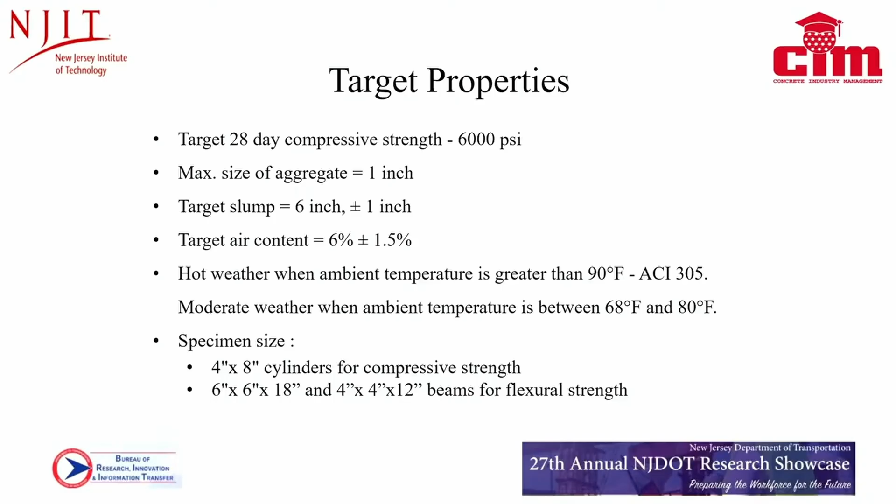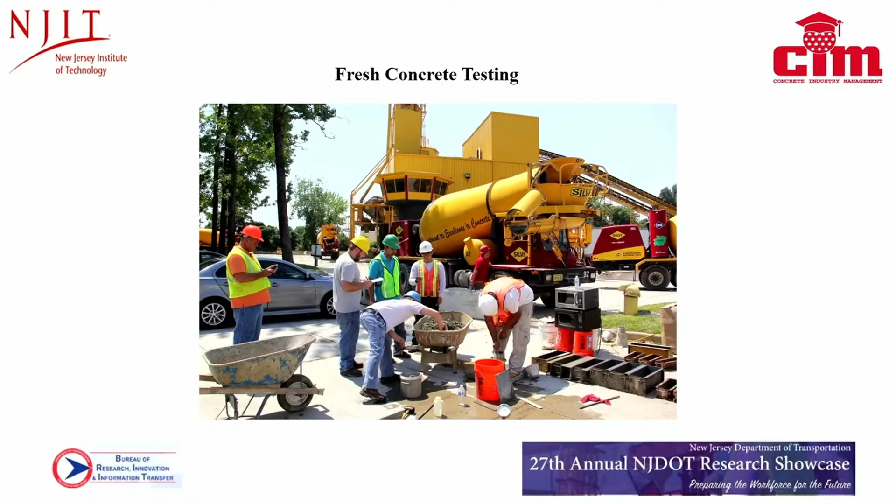So here we have pictures of our molds, pictures of tests being done. That's the concrete truck in the back with the actual concrete. Again, we decided to do it on a large scale so that it replicates actual mixing in the field.

One of the things we did, like I said, there were different parameters, different criteria that we used: summertime and fall, so hot weather versus moderate temperature. We also utilized hydration stabilizer and without hydration stabilizer. Also to note, the only modification we did to the mixes after the initial mix were with the high range water reducer and air entrainment, because naturally as the mix continues it will tend to lose air.

We wanted to maintain that air entrainment level, about 6%. What we found is that for the 100% cement, we had to redose about every 30 minutes, and for the cementitious materials with fly ash and slag, we had to redose about every 90 minutes. Of note, no additional water was added. The hydration stabilizer, if used, was introduced at the beginning of the mix. After that, the only time the mix was tempered was with high range water reducer and air entrainment admixture if necessary. So here we have the specimens.

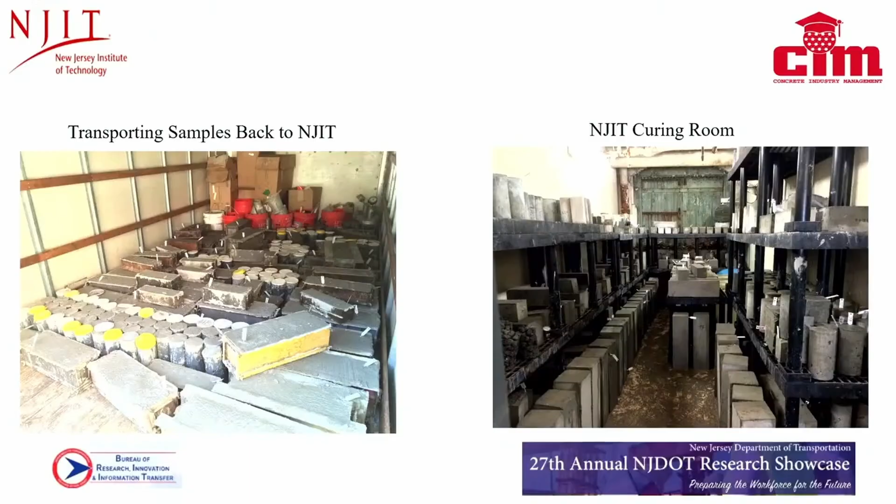So we have a number of graphs. This one speaks of slump. You have mix 1, 2, 3 - remember mix 2 and 3 were with fly ash and slag. The slump didn't vary much except in the beginning, but as you can see it pretty much was stable throughout up to 180 minutes.

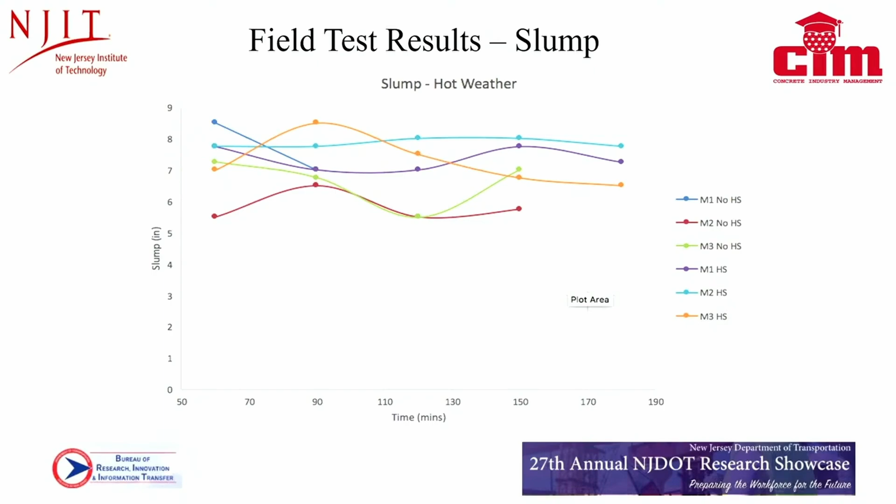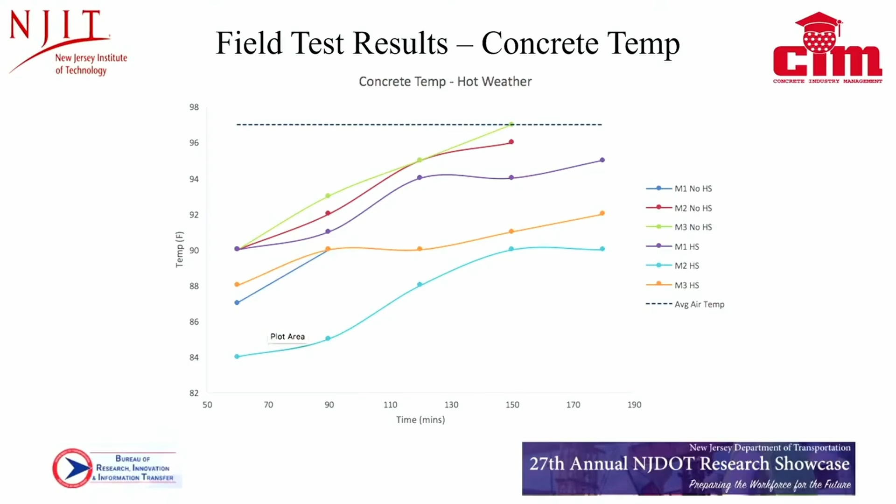The temperature - if I recall correctly, we started out with freshly mixed concrete at about 85 degrees. Of course, as hydration kicked in, it increased by about 10 degrees over the span of that 2 hours, which is not bad considering.

Temperature again here. This one is no hydration stabilizer, and as you can see, with the hydration stabilizer I was able to maintain it fairly constant.

Compressive strength - the target compressive strength was 6,000 psi, and we were able to meet the compressive strength even at 180 minutes with those samples. And what we found was that the tests we did during the fall had compressive strength slightly higher than the concrete we mixed during the summer. We think that is based on the slower rate of hydration for the concrete.

I'm going to go through this a little fast. So we have compressive strengths again - as you can see the target was 6,000, and we were able to meet that. If you look at the 28-day line on the graph, you'll see we were definitely hitting our target beyond the 28 days with the concrete. Same for moderate weather - we hit our 6,000 psi target.

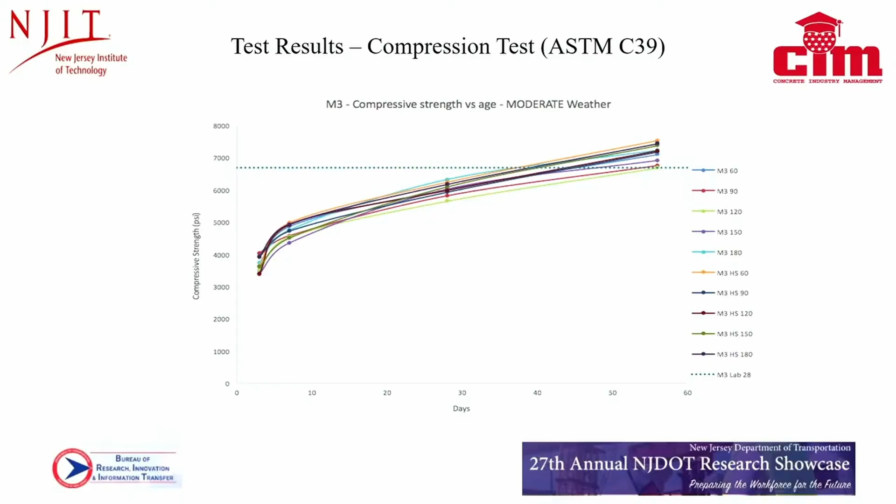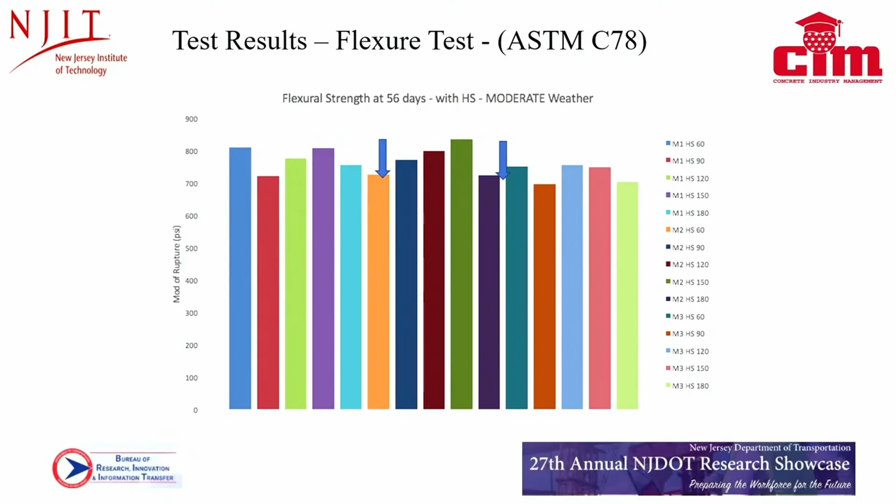So flexural strength is usually about 10-11% of your compressive strength, and we noticed there was no significant impact on that either. As you can see, it's fairly consistent. This one is with no hydration stabilizer. With hydration stabilizer, you see it's above 700 psi - again, fairly consistent.

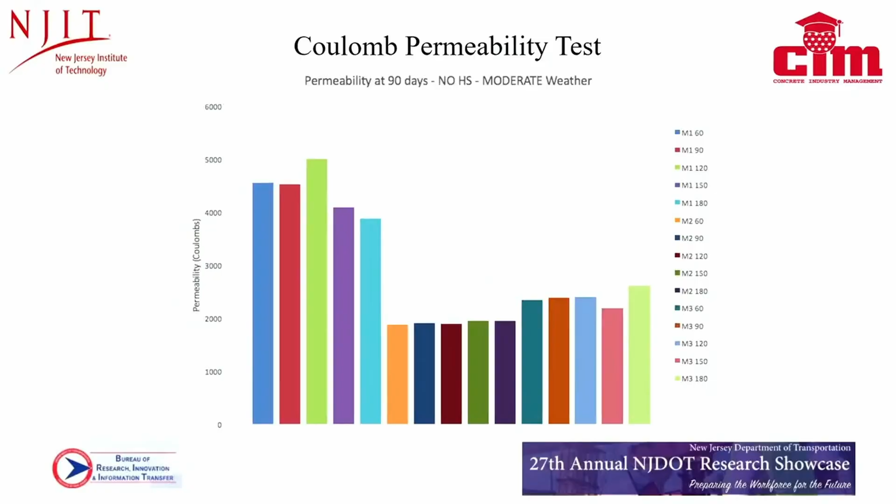And permeability test - this one was done using the rapid chloride permeability test, which I don't know if any of you are familiar with. It's basically applying an electrical current across a specimen and reading the conductivity. As we can see here, results were fairly good.

So summary of the research: we found that the mixes were workable up to about 150-180 minutes. The 100% cement mix was workable up to about 100 minutes, which was just a little bit over the 90 minutes.

I think I mentioned earlier that in hot weather, for the 100% cement mix, we had to retemper with high-range water reducer and air entrainment just about every 30 minutes, whereas with the slag and fly ash, just about once every hour. So the slag and fly ash was able to maintain, especially the slump, its workability much longer.

Here we go - slag and fly ash worked up to 180 minutes. During the fall, again with the cooler temperature, all the mixes had extended working times very comfortably.

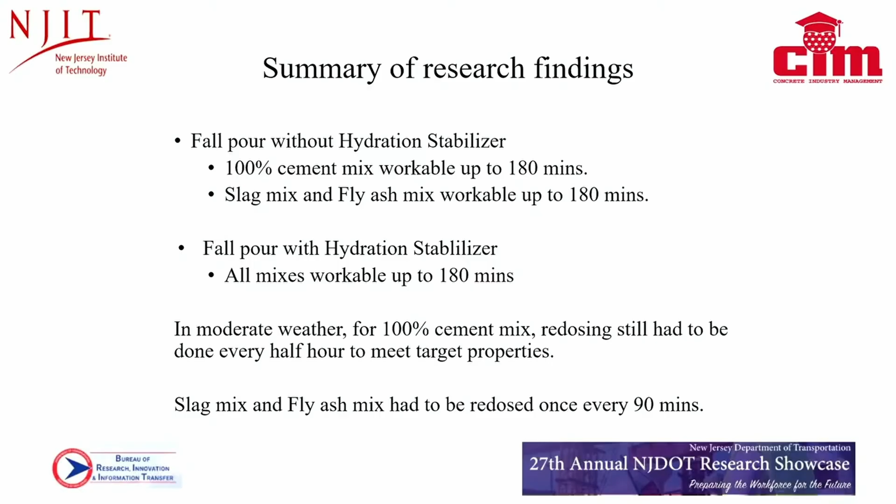So again, we found that the compressive strengths for the mixes done during the fall were higher than the ones done during the summer. We feel that is because, again, the rate of hydration was slower, so the mixes needed to be retempered less. We were able to meet our 6,000 psi requirement.

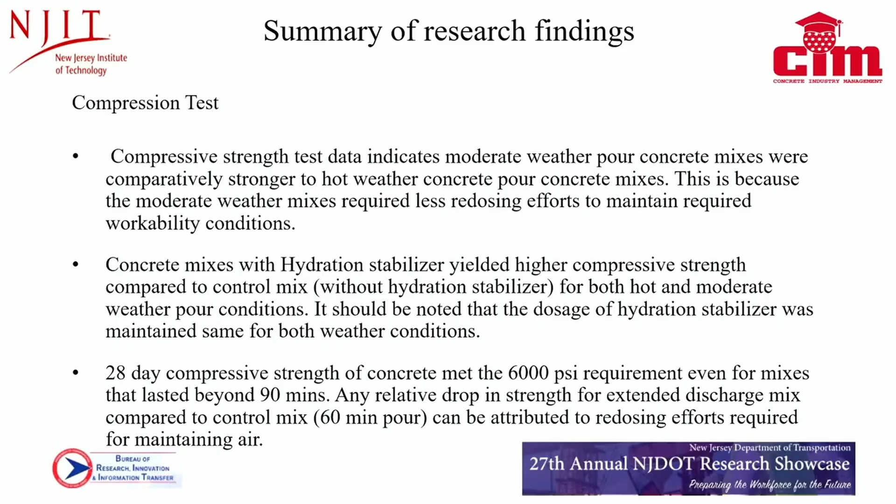The ones with hydration stabilizer basically gave us better results. The flexural strength was good, about 11% of compressive strength. There was no considerable change in permeability - the permeability tests were fairly consistent across all timestamps: 60, 90, 120, 150. So we were basically doing tests every 30 minutes.

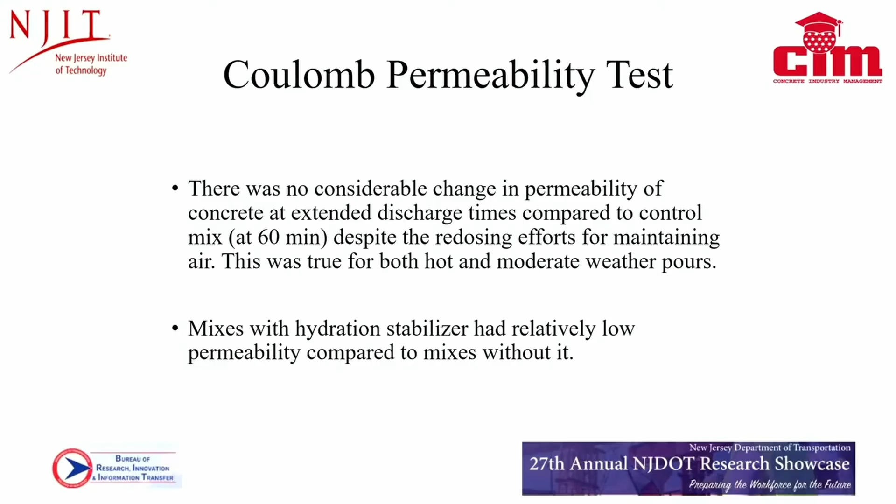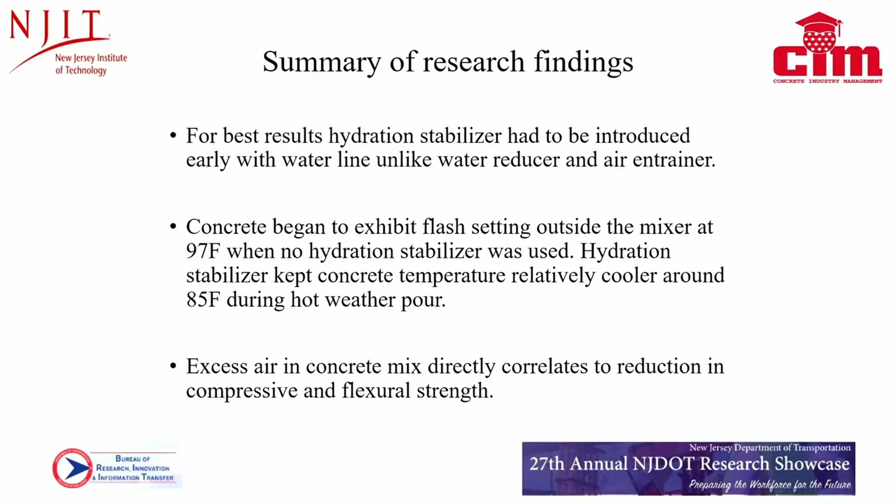And of course, the use of hydration stabilizer is what enabled us to maintain concrete temperature and slow down the rate of hydration so that we could experience the workability beyond 90 minutes. So hopefully I did justice to that presentation in the absence of Dr. Mahgoub. Any questions?

Sure. There's a maximum number of revolutions on the drum. There is a maximum. What I gather from you is that you mentioned there's a maximum amount of revolutions on the drum. That is correct. So if you go 180 minutes, the barrel's going to be turning quite a bit. That is correct, and that is one of the reasons why we did the research, because ASTM C94 pretty much governs all of that, from the weight per minute to the maximum amount of revolutions of the drum.

You're quite right, but our goal is basically to facilitate the conversation. How are we able to extend the lifetime of fresh concrete beyond 90 minutes so that we could reduce waste, become more environmentally friendly, et cetera. So our goal is not to vouch for immediate change of the specifications, but to enable the conversation and be able to treat it on a case-by-case basis, because the reality is the technology and mixture technology has improved significantly over the years.